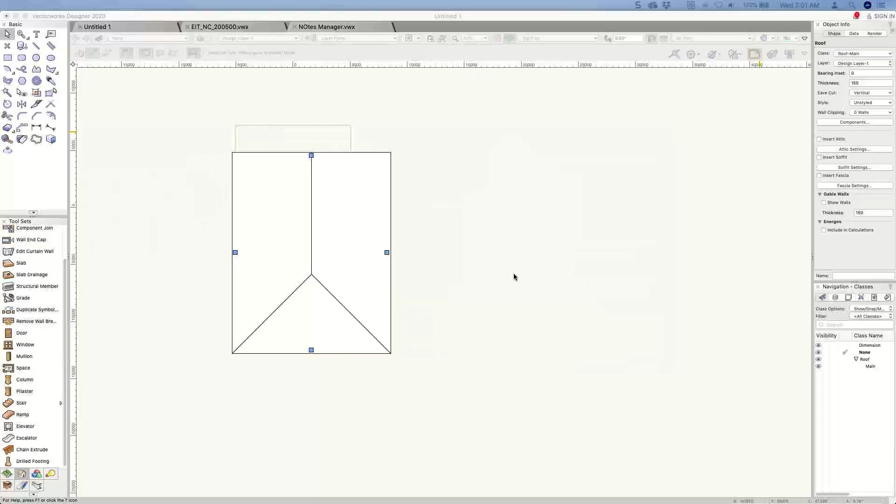I don't know if anyone's been looking at the Teaser Tuesdays that Vectorworks has been releasing. Some of those, the 3D modeling and the change in the interface, extremely cool, and I think really productive. And Barbara, we're going to plan to have a What's New in 2021 free webinar, aren't we? Absolutely. And I'll show you how to take advantage of those things as well.

So I'm going to start by looking at a roof. So the first question, let's look at my first question. The first question I had was, what's the best place to get started thinking about the marionette tool?

So one of the issues I've got, Ashot, is that the marionette tool requires, I guess is too strong a word, but in order to use the marionette tool, you've got to understand the thing that you're trying to make. Now the marionette tool, and marionette's not alone in this, there's a couple of other things that do the same type of thing. It's called a visual scripting tool.

And the idea is, can you see my screen, Ashot? You can see there's a little animated GIF that I've got running here that goes through the concept of marionette. You need to create an input, and then you've got a thing called a node. The node tells the input to do something, that is, take information, take a dimension. You can see what we've got here is I've actually created a manual on how to use marionette, and these were just some images I took from it. So we've got an input, the node does something, we then do something to it, and we get a result. The basic concept of marionette is that you've got nodes, and then you connect the nodes together with wires, these little curvy things here.

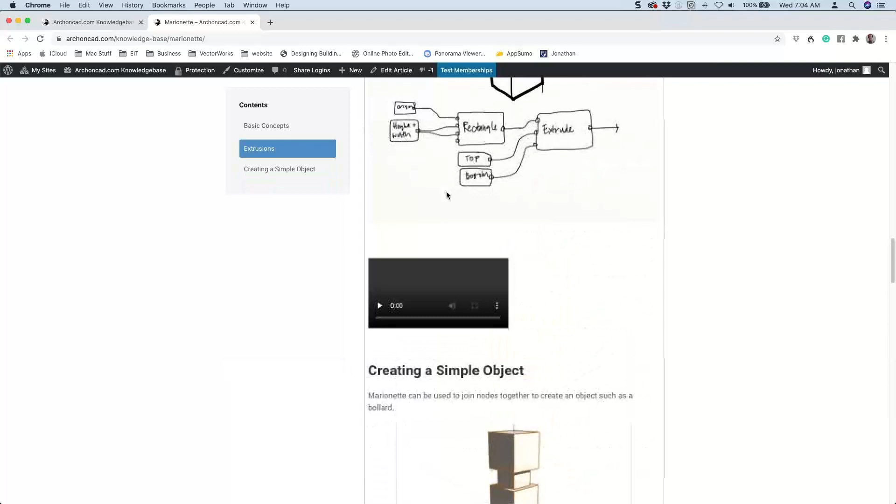And it comes a little bit back to the way you create a three-dimensional object in Vectorworks, or the way you create a complex object in Vectorworks. We don't start by creating a complex object. We start by creating a simple object and then adding another simple object to it and then another simple object. So I've tried to create a manual that works through this. On my old website, learn.archoncad, there's actually a manual that goes through this, and I'll make sure I provide a link here so you can read through the manual itself. I didn't want to do marionette today, perhaps, but if we have time, I wouldn't mind doing a couple of simple things with it.

But the real trick is that you have to learn to break this object up into chunks. So, for example, if we were going to build the bottom of this object here, we'd want to get a rectangle and we'd want to extrude it.

If we want to get a rectangle, we need to know the height and the width of the rectangle, and we need to know where the origin of the rectangle is. Those nodes will input information, feed it to this node here, the rectangle, and it'll feed the rectangle down that wire to this next node here.

Then we need a dimension for the top and the bottom of our extrusion. So the top controls the height at the top, the bottom controls the start elevation. We add that to the rectangle and we get an extrusion at the output.

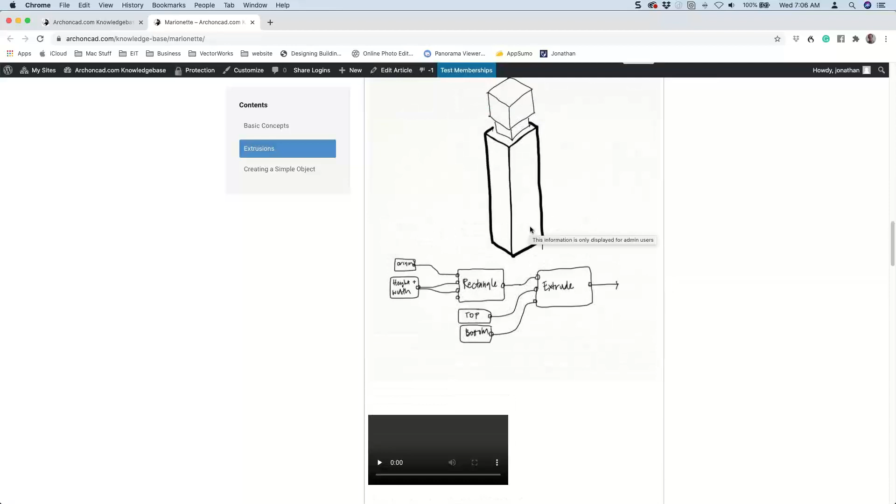So it's really a matter of understanding how these things flow. And I don't know why, but they flow from left to right. You can't make them flow back the other way very easily. Could be something to do with the way we write from left to right, maybe. So too bad if your language goes the other way. But anyway, that's the basic concept. I think if you want more, we'll get into more later.

But the next question I wanted to cover was the question about stories. So Faye, you said that you tend to use layers, but you have trouble using stories. So let's go back to Vectorworks for stories. Now I think that you need to have a use for using stories, Faye. You don't always need to use stories, but you need to think of stories as being a collection of layers.

So if I go in here and I start creating stories, and where's it gone? It's gone to the other screen, of course. Let's bring that in.

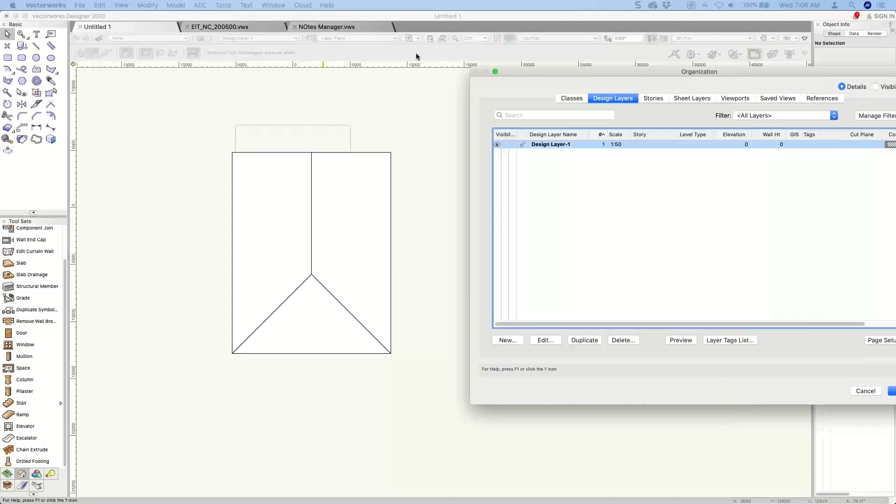So if we have a look, we've got this concept of stories. Now, if you've got stories already created, let's just add a few stories. We'll just duplicate a couple. If you've got layers already created, I should say, we can create stories and add those layers to stories.

But it's a lot easier to start from the beginning and add those things from the beginning. So, for example, if you're going to use stories, it's better to start right from the beginning with stories. I'm just going to delete all of these. It's better to start with this without anything on your design layer and start by creating stories.

So first of all, Faye, what are stories used for? You need to think of stories as being a collection of design layers and a collection of controls is probably the easiest way. So when I create a new story, I can call it story 1. Now Vectorworks does like calling it story-1.

I've tried calling it level dash or level or floor, but Vectorworks quite likes calling it story. So in the end, I just stopped arguing with it and just let it do it. We've got here a collection of levels. So levels in Vectorworks can either be a layer or a three-dimensional height control.

Now, I don't use stories very often because a lot of my work is single story, only one floor of the building, or at the most it's two, and I don't use levels to control a lot of things. But let's say, for example, I wanted to create stories and I wanted to use stories to help control things like my door and window heads, which is quite a cool way of doing it.

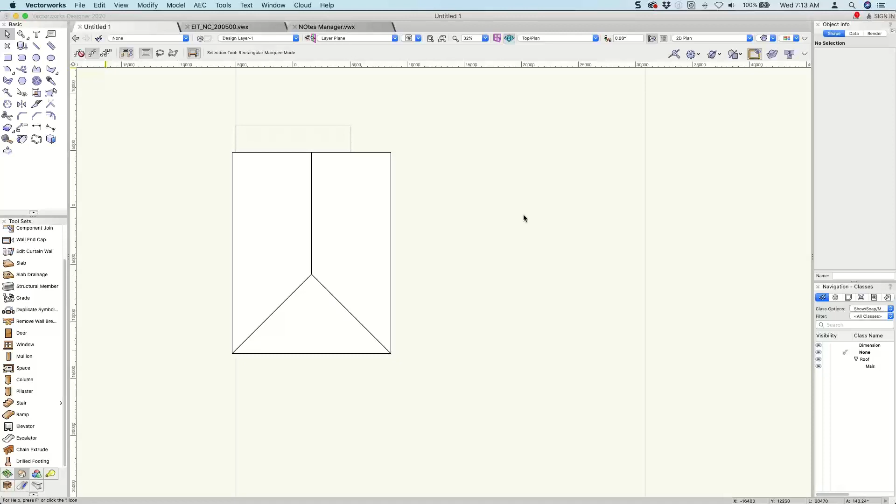Now, I just don't know what some of these levels mean. Sometimes when I create them, I think this is a Vectorworks thing. Some of these are Vectorworks ones. So I'll start with a brand new blank file and we'll see what Vectorworks have got for us. File, new, I need a blank file. So this is a brand new blank file from Vectorworks.

If I go here and create a new story, these are the typical Vectorworks stories that it creates. There's one called ceiling, top of parapet. I'm sure these used to have different names, something like ledge. I actually don't understand what a ledge is, so I don't know if I want a ledge. In fact, I don't even like the word ledge. So I'm going to edit my defaults.

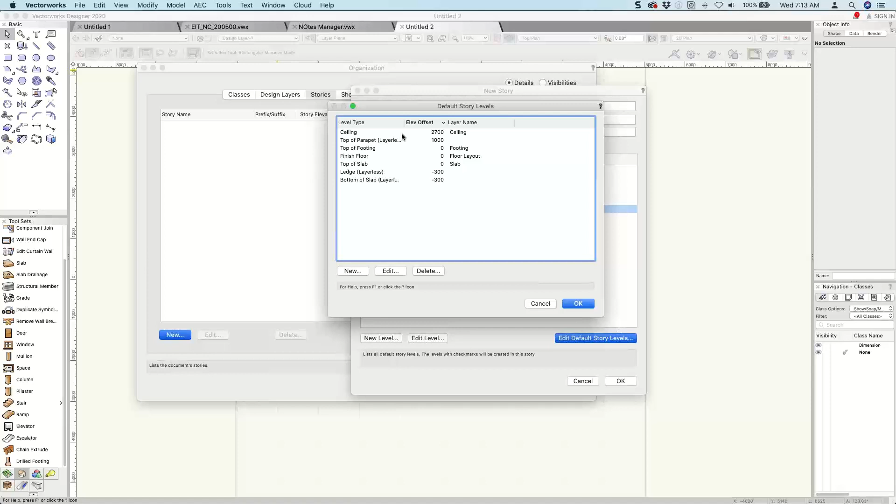Now, if you don't edit your default story levels, you don't get the ability to apply them to every different layer. So ceiling is pretty straightforward. Top of parapet, that might be quite useful. But what do we mean by top of parapet? Parapet's normally a wall at the high level.

I don't use those, so I'm going to remove that. I don't like the word ledge, I never know what it means. Does it mean the bottom of the slab? Is it the bottom of my brickwork? What is it? It could be anything, so I'll get rid of that. So I've got a ceiling, a top of footing, a finished floor, a top of slab, bottom of slab—I don't like that one either, so I'll get rid of that one.

So the sort of things typically that I would use for my default story levels would be, let's start from the ground and work our way up. So let's go new layer, new level type, and this is bottom of footing.

Better spell it right. Is that better? Eventually got there. So, bottom of footing. What's the elevation of this? Well, it might be working in millimeters, so let's make it -3 feet, -900 millimeters.

Do we want it to create a layer? No, we're just using this to control the elevation of something. Let's create a new one, called top of footing. Oh, there's one there already, top of footing. The elevation is -600, so -2 feet. So I'm actually going to end up, I can create a wall that goes between the bottom of my footing and the top of my footing, and it'll be exactly 300 millimeters, or exactly 12 inches.

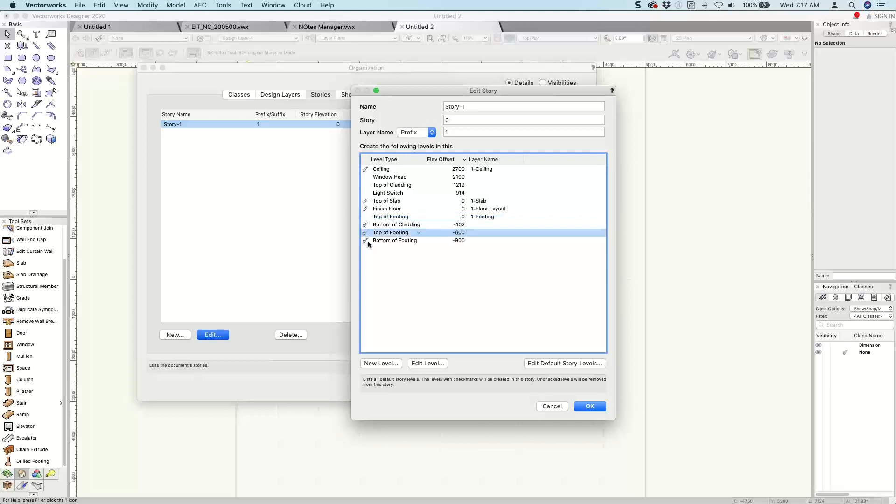We need a finished floor. Do we need a top of slab? Yes, maybe no. We need a light switch, we need a cladding, we need a window head. So down here, you just tick the levels that you need, and it'll create the elevation controls at this point.

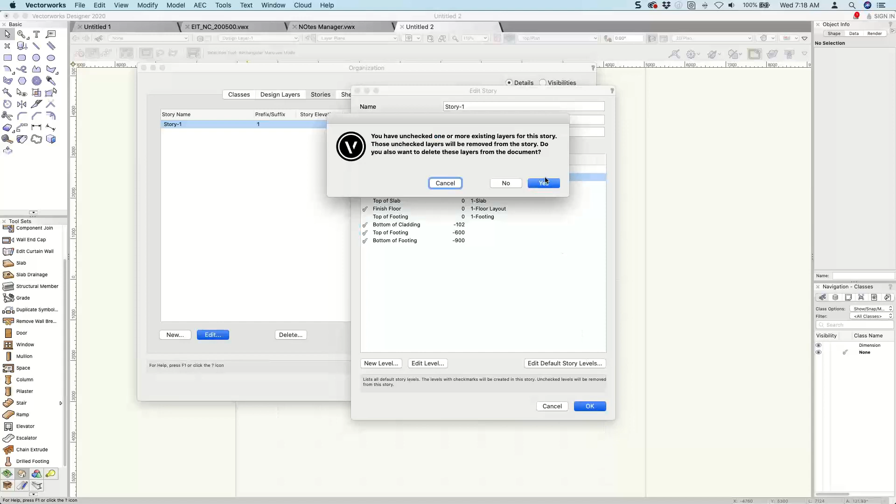So let's OK that. And yes.

Barbara, I see there's some questions. Let me just have a look at the questions. It's some people saying they missed the start. Hold on. Yeah.

Right, so someone would like to review strategies for the wall tool. Maybe we can have a look at that. And someone's asking questions about site modeling in 2021. I'm sorry, I can't talk about what's in 2021 until Vectorworks mention it, but if there's a change, Bob, we'll certainly be looking at it. So, Faye, I'm not sure whether I'm answering your questions the way you want. If I'm not, please send some more questions through, and let's make sure that we're getting the information that you want.

So we've got this ready to go. We can go to our floor layout here. For some reason it's called layout. I'm going to create a wall now, Faye. I'm going to create a brand new wall, and of course it's going to create that on my other screen. So here's my wall here.

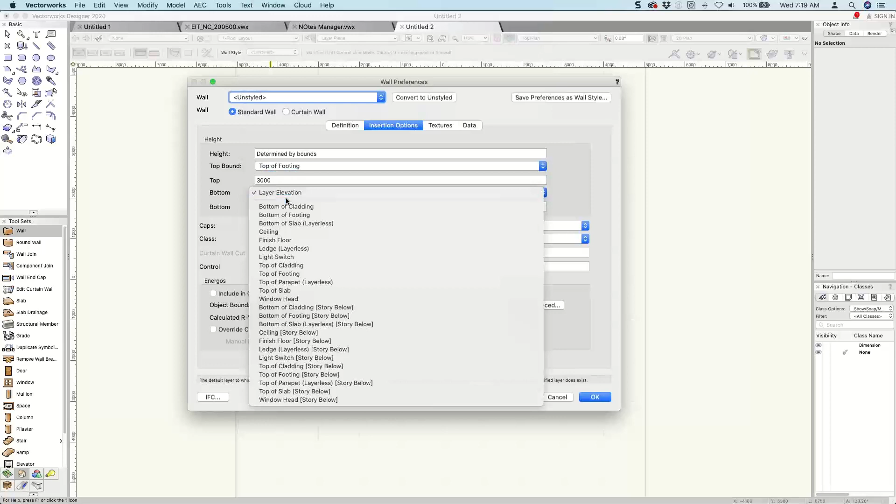It's an unstyled wall, and I want this to be a foundation wall. So what do I want to happen with this? My insertion options are to set the top of the wall, the top bound is the top of my footing, and the bottom of my wall is the bottom of my footing. And let's get rid of this number here. So if I create this wall, it should be fixing this wall between the top of my footing and the bottom of my footing.

So let's just draw a quick wall and we'll try it, so that we'll just draw a simple building. There we are there. Let's look at it in 3D, and that should have fixed it between the top of the footing and the bottom of the footing. The height should be 300. Now I'm going to save this as a foundation wall, so let's save this, go save, and we'll call it foundation.

So that's a foundation wall. Now I want to create a new one. I'm going to create a more complex wall. This one's going to have components in it.

So this is going to be my lining. I always start on the outside, so it's my cladding. Cladding, its function is outer finish. Its class, and I should really have classes for all this - I'm not going to go through that at the moment. But I tend to use a class for the cladding, for the air gap, and for the framing.

And I've got all those things stored in a class. I use a class and layer. I just got to go find it. It's hiding in my Dropbox. So you guys can't see it because it's on my other screen, but I can see it.

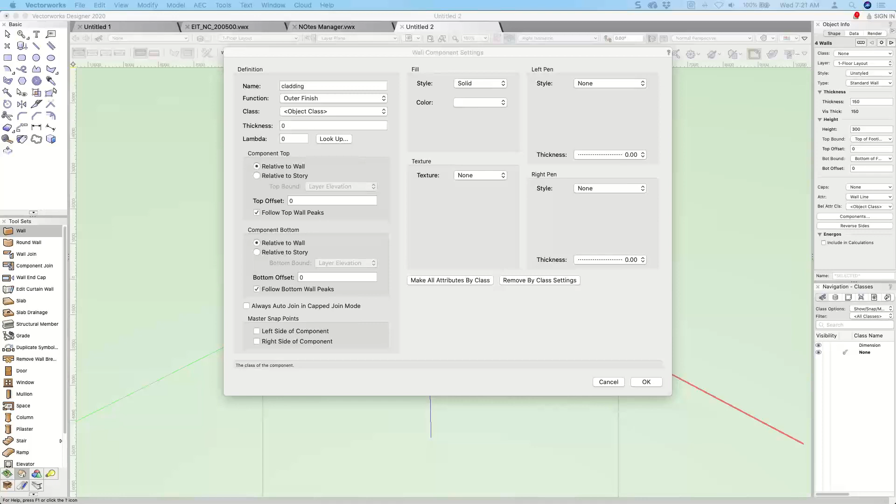Vectorworks Architect. Cool, so I've got a standards file which has got all the classes that I like to use. So I can hit the letter W, and you can see all my wall types. So I can import all of these components.

And this is going to be wall component cladding. The thickness is 90 millimeters. I'm not going to worry about the lambda. The lambda relates to Energos, or the energy calculation side of things. I'm not going to worry about that. So my component top is relative to a story, which is top of cladding.

Where's top of cladding? There. And the bottom is relative to a story called bottom of cladding. So this is now going to control where my wall stops and starts based on the levels that I put in. And we'll make all attributes by class.

Now I've got an air gap, so I'm going to create a new thing, which is my air gap, which is a cavity. Its function is air gap, and its class is wall component cavity. Its thickness is about 50 millimeters, about 2 inches, and it's relative to the wall.

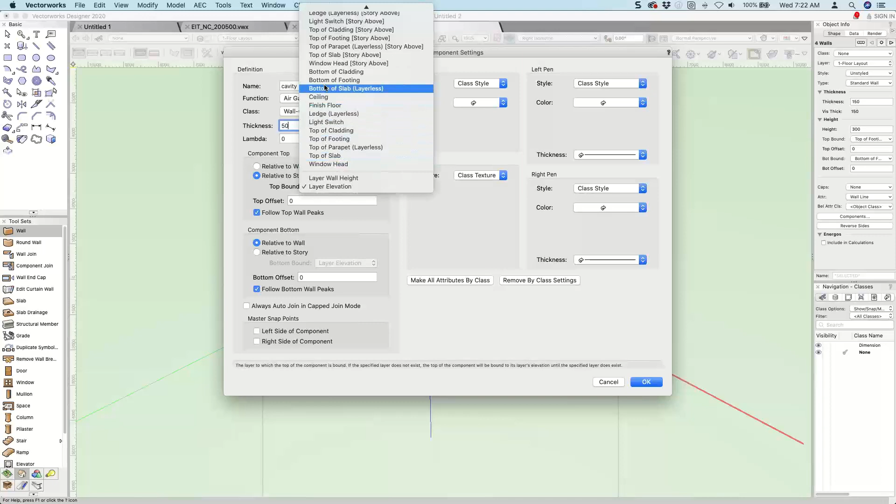This time, because my air gap's going to stop at my top of cladding, I'm going to stop it there. Now let's leave it relative to the wall, and then we'll play with this. Let's go OK on that.

Next thing, I need some framing. So I'm going to put timber framing in here. Its function is load bearing. It's going to be wall component, and I'm going to do frame. And its thickness 6 inches or 140 millimeters.

I think that's enough at the moment. So now what I'm going to do is I better save that too. So let's save this preference, and we'll call it brick wall.

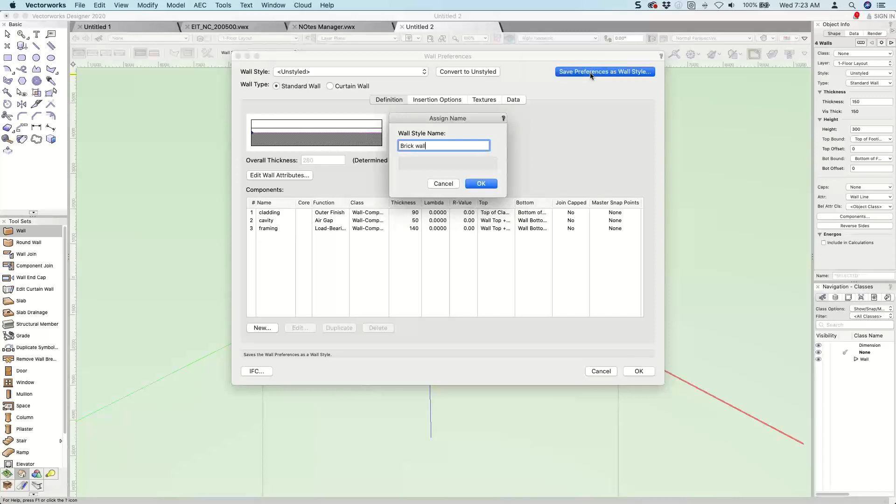Cool, now I'm going to use what I've already drawn as the start of my wall. So if we look here, we've got the ability to do wall control line, which is using the overall size of the wall. This is my control line on the left. If I choose my core component, let's go back to my brick wall here.

I didn't nominate which is my core, so I'm going to nominate framing as my core. I'm going to save this again as brick wall and replace the old one. So now I've notified, or I've indicated that one of these is the core of the wall.

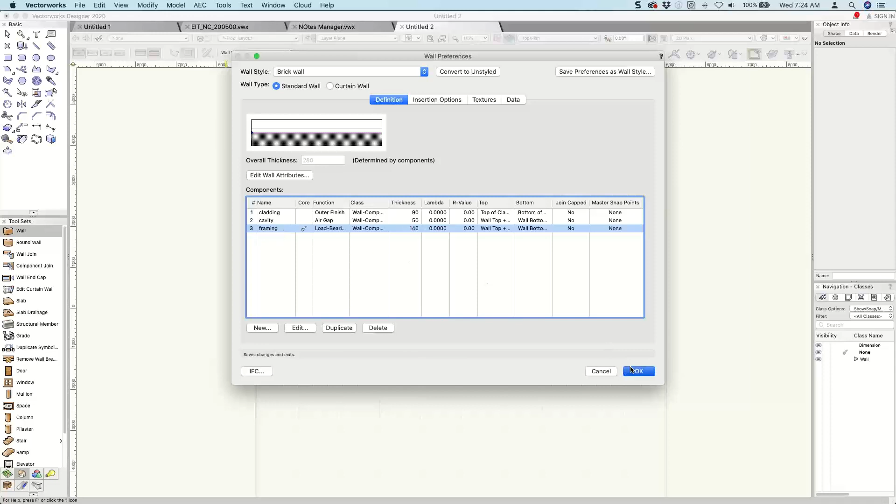And now I can use this option here, the wall core, and I can use that outside point there to that outside point there. And you'll notice this time that my wall is sitting here, and there's a gap between the two of them, because I really need a foundation wall that goes between the two, and all I've really got is my footing.

So if we go back to my wall styles, we're in this one here. Let's look at my foundation wall. Let's edit this one. And what we'll do with this particular one is we'll edit this wall style, and we'll tell it that the wall style needs to go between, the top bound needs to be the layer elevation.

And they should all have changed. Did I save that? Let's go back and edit that again. Foundation, layer elevation. Okay, and these ones, I've got too many selected. Let's select that one.

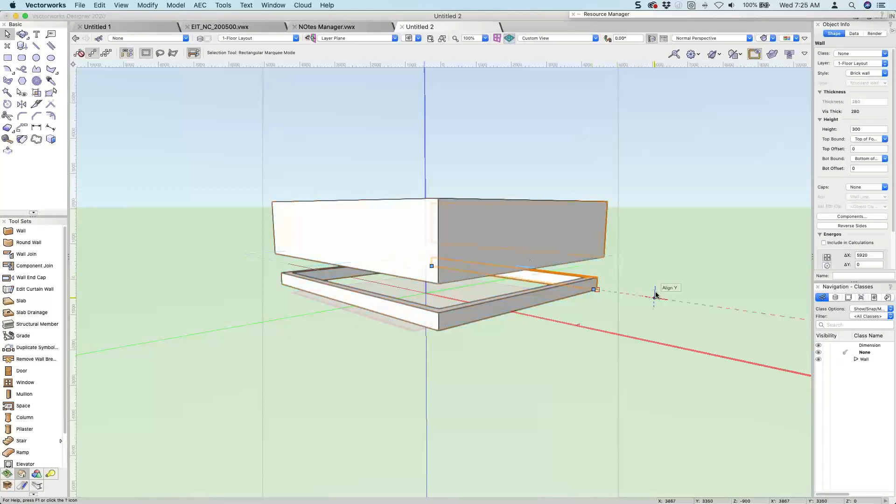These ones need to be selected, all of them again. If I join, maybe I've joined them all together. Let's delete those ones. I'll just select those ones there.

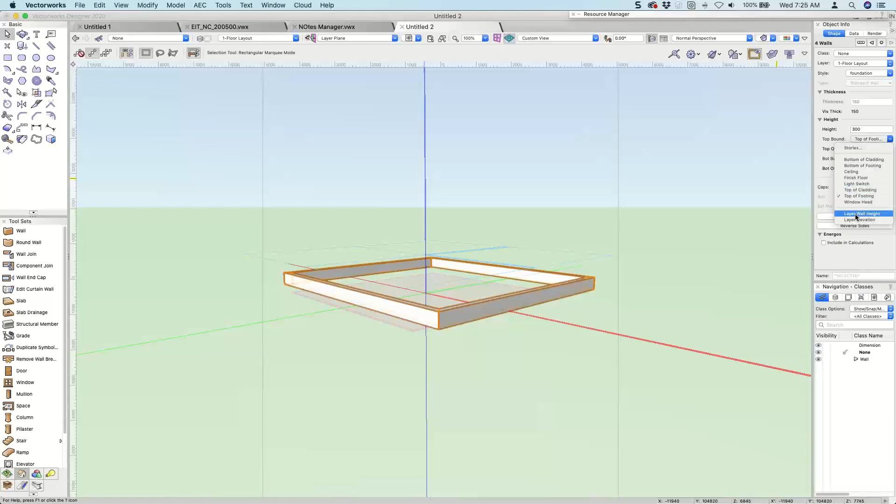As I thought, unstyled. So let's replace this with my styled wall, with my foundation. And now that should have changed to the layer elevation. So it should have brought my foundations up.

And then my other wall should be sitting on top of those. Now I'm worried that - oh yeah, cool, that's not. Now let's go back to my other wall.

This wall here, let's look at my wall preferences and insertion options. So the top bound of this wall should be the layer wall height, and the bottom bound should have been the layer elevation. That messed me up a little bit. We'll save it as a brick wall again.

So this time when I draw the walls, I should be able to draw those walls like that, and they should come together beautifully. You can see here I've got this wall, which is my brickwork.

So what happens if we then go to the stories and start changing those story heights? Let's edit our stories, let's go to the top of the cladding here. Remember, this is the top of my brickwork. If we edit this level and make it 12 inches or 300 millimeters, it should affect all of those walls that go around the outside. So that's a description of how you can use the stories.

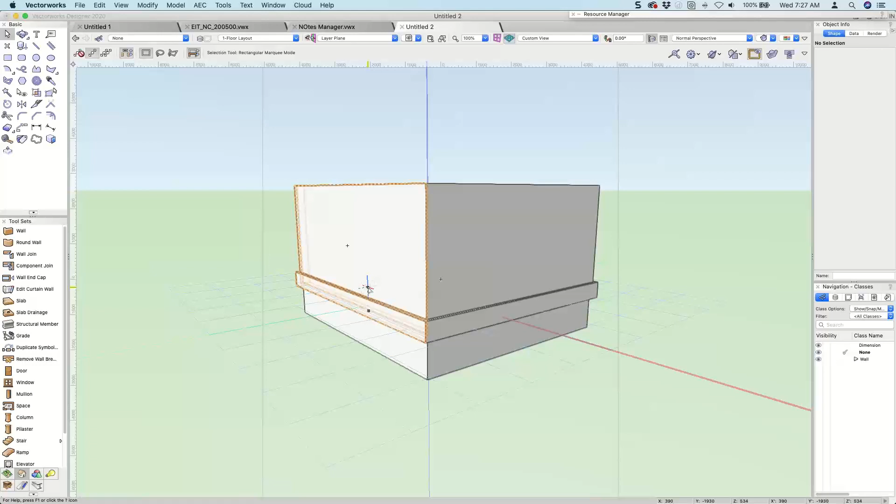So Faye, back to your original question. My curiosity is, do you want to use that complexity, or are you happy to do it a different way? Because there's more than one way to do this.

And if you want to use these levels, they can be very powerful. When you create symbols, you can connect a symbol to that object. If I've got a light, I might have a light switch I can use. Electrical, switch elevation, switch, I think this one will do.

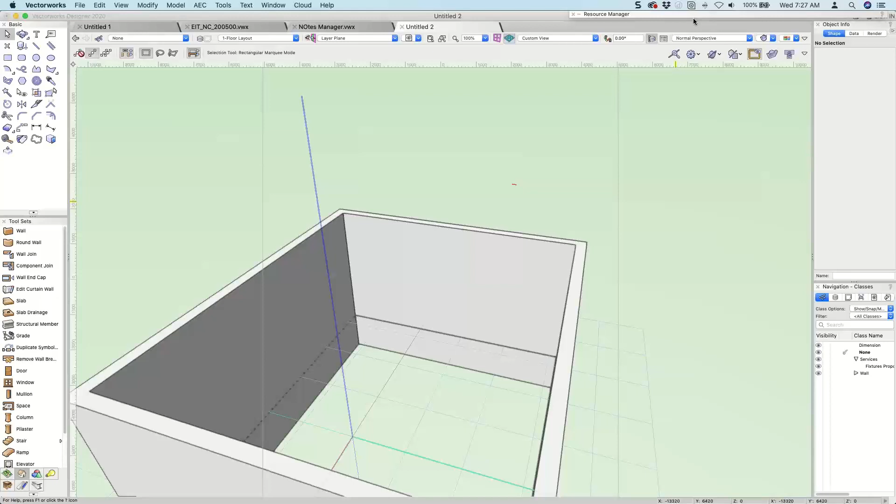When I place the switch, it's a 3D switch, my ones - no, I have created some that are three-dimensional. Not the elevation one, I've created some light switches which are three-dimensional. I think this one here, socket 2.

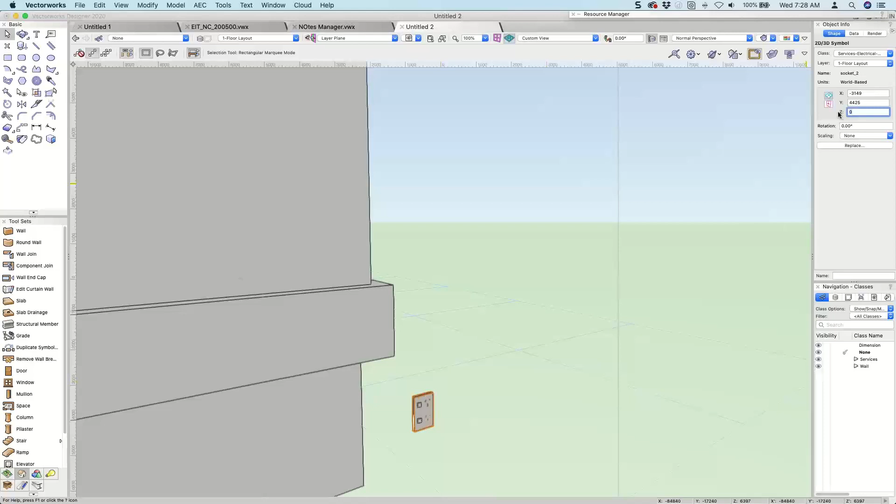And when you create that switch, you can see it's got an actual socket to it, and I can set a height to that. But you can also, when you create the symbol, link it to a particular level.

So if we go back to this file here, it's called socket 2. Let's edit my symbol options. Here I can actually assign it, I can make it story aware. And did we call one light switch? I think we did, light switch.

So we can say it should be on the edge of my wall, and it should align up with my light switch elevation, and then that thing should jump up to my light switch elevation. So if I've changed the light switch elevation, it should work.

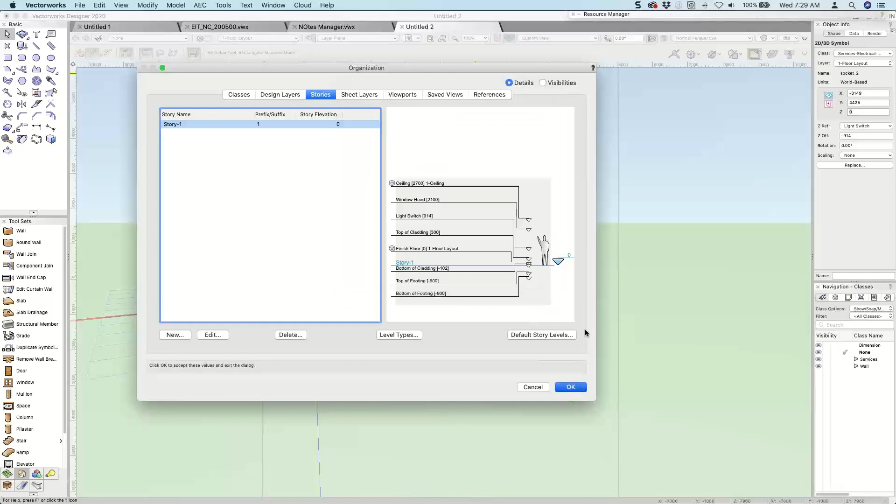Stories, light switch 914, so that it should have made that thing jump up to the light switch, which I think it's done. Has that light switch got Z offset 0? And you can see there, now it's sitting on my light switch elevation. If I change the elevation of that layer, that light switch will go up and down. So there are some things that are really quite important.

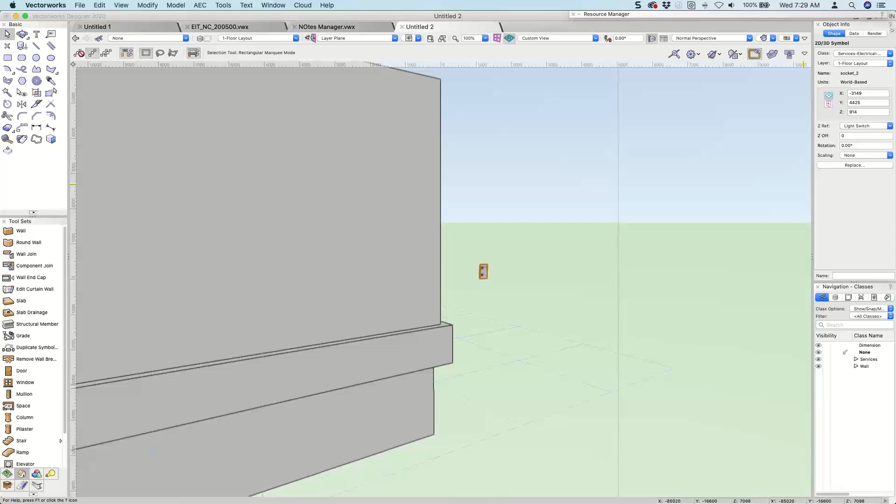So Faye, some of these things - you said now that you understand stories a little bit more, you're quite happy sticking with layers. Just when you're sticking with layers, that's fine, I often just use layers. Remember to control the 3D height of the things, so you can create the things that you need.

How are we getting on for time? Okay, so Faye said she's happy.

So let's talk about roofs. I've got a roof I think I wanted to play with. One of the things I wanted to make - someone was asking me about creating a skylight to put in here. So I'm going to use a window to create a skylight. Here's my window here.

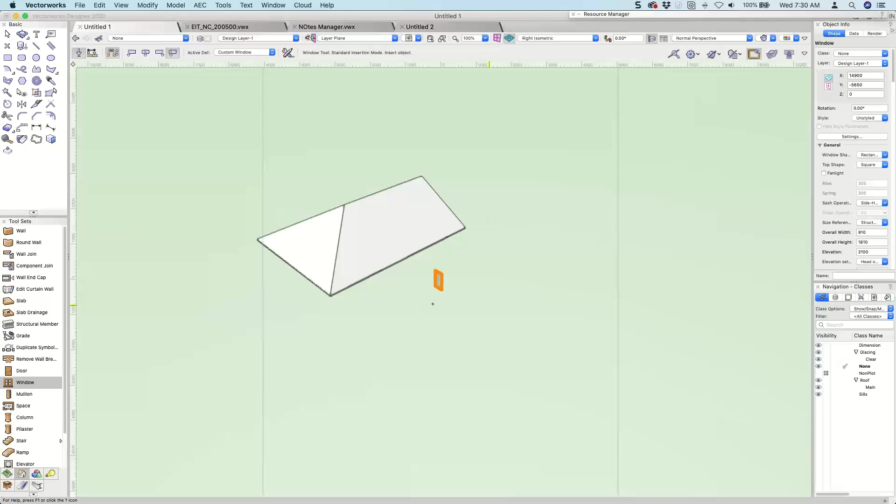The beauty of using a window to create a skylight is that it's really easy to create a simple window. You can put mullions in it, you can put breaks in it, you can do all kinds of cool stuff, and it does create some of the structure for you.

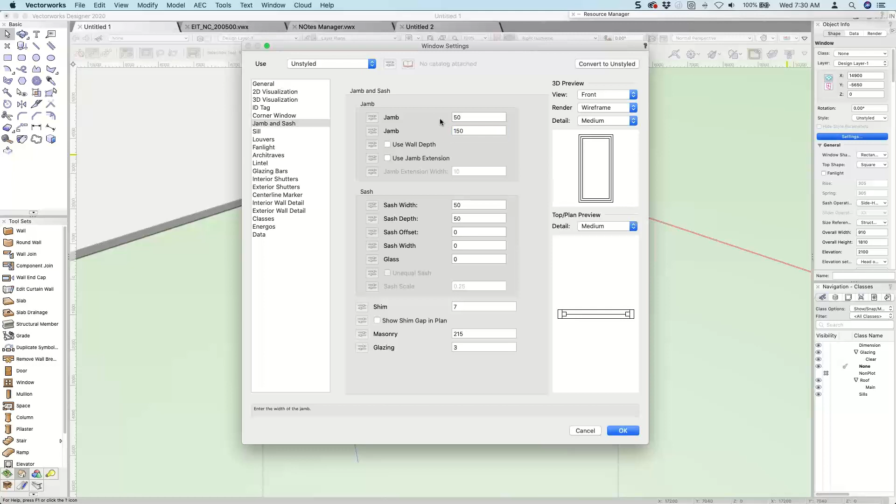I'm going to go to my settings and make it a little bit more the size that I need. Let's just have a look at my window settings. So for my window settings, I need the jamb to be about 50 millimeters, but I need this to be 6 inches, 150 millimeters.

Now, if we leave that window as it is and we stick it in and try to use it as a skylight, you have to make it into a symbol. But if you make it into a symbol without ungrouping it first, then it doesn't work. So there's something really crucial about where we place the insertion point of our symbol.

So I'm going to make this so it's easy mathematics for me. I'm going to make it the structural opening, exactly 3 feet, 900 and 1800, so the mathematics is easy.

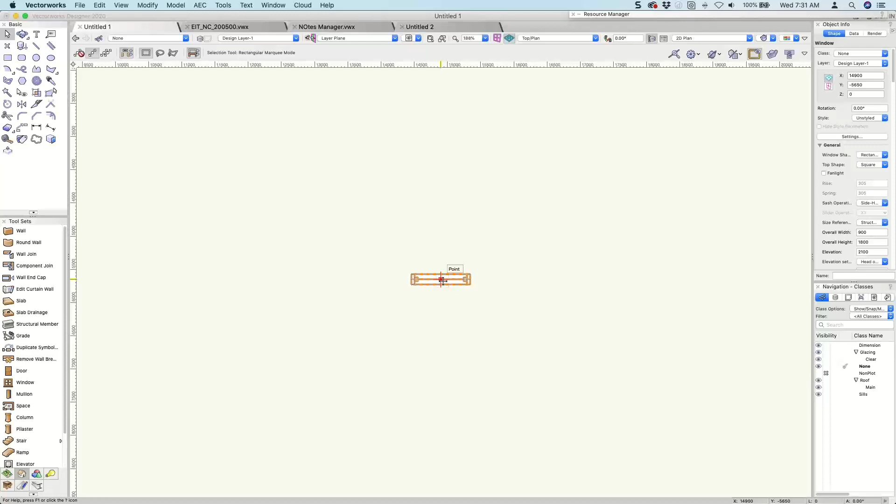So the easy way to create this into pure 3D only, because it can't have any 2D parts, is to go modify, convert, convert to group. When you convert it to a group, you lose the 2D part of that window. So I'm going to use this as a skylight. Next thing I'm going to do is make this into a skylight - create symbol. This is my skylight.

Next mouse click. Don't insert on walls. I can choose a class for this. So I can create a new class and call it...

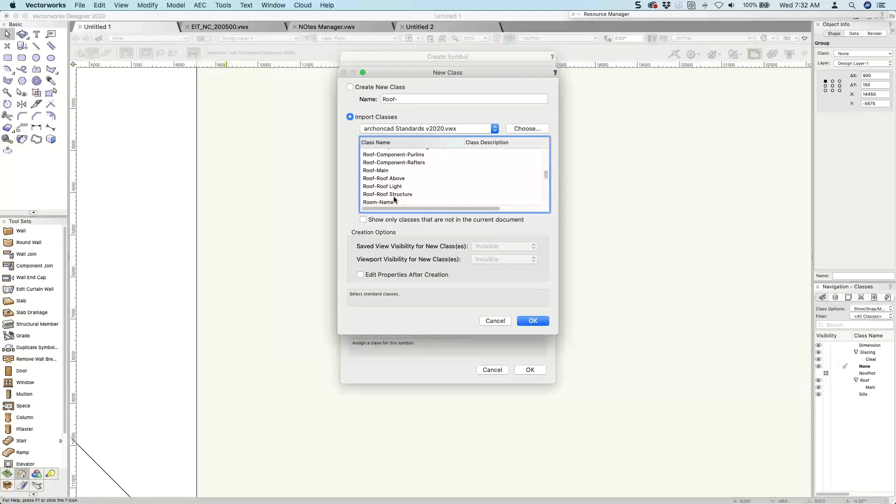Roof-skylight, but I might have one already to go. Let's go letter R. Roof, components, roof main, roof above. I could use one of these ones, roof light.

It's really handy if you've got a list of classes that you use on a regular basis, save it. Those of you that subscribe to my website will find it under the library options. You'll find that I give you my classes. Makes it so much quicker.

So I'm going to click here and OK. So the insertion point of the symbol, it's now a symbol. Let's have a look at it. What did I do wrong?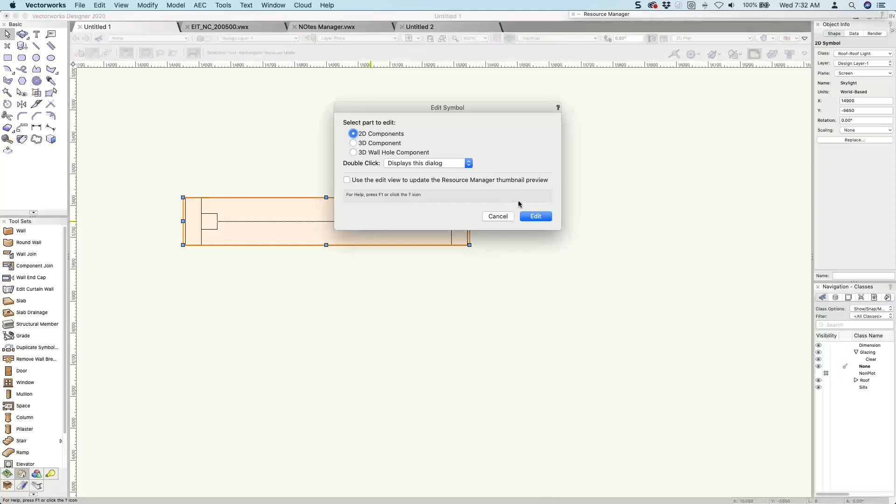I'll tell you what I did wrong. Let's go back. It's a window. I converted it to a group in a 2D plan view, and all I ended up with was a 2D version. What I need to do is change to a 3D view, do the same thing, convert to group, and I'll end up with just the 3D portion.

So now I'm going to go back to a plan view. I want to make that into a symbol again, create symbol. It's my skylight, so I'll call it skylight 900 by 1800. So I know what size it is.

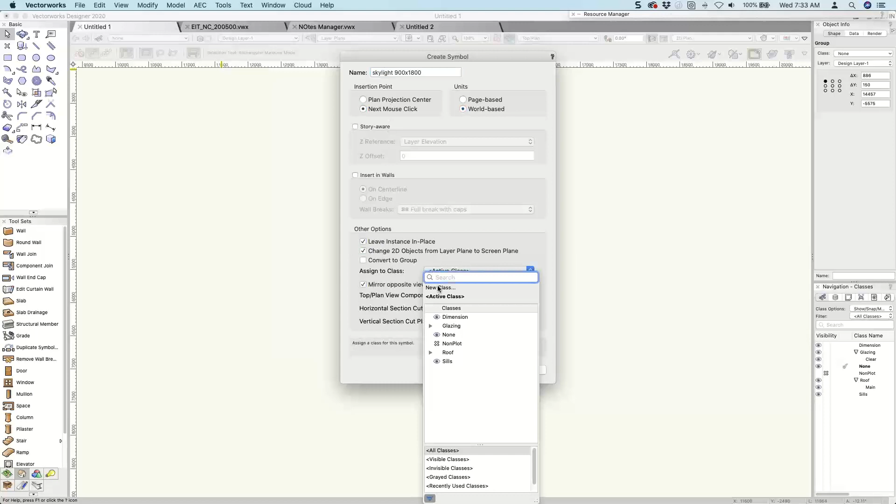Next mouse click, let's put on a class, we'll call it roof. Let's create a new class, roof light. There, okay.

Cool, so there's my symbol, it's in 3D. Let's find it and we'll have a little fun with it. This one here, skylight, let's edit the 3D component.

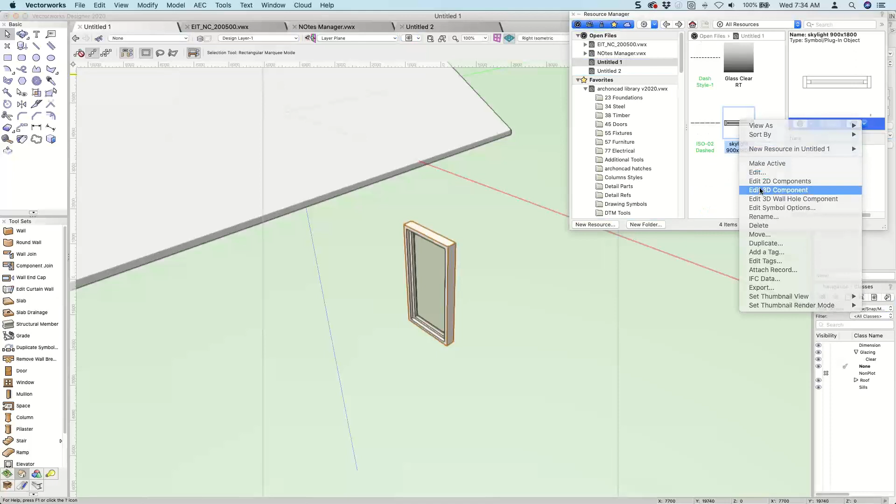So if we have a look at this and we look at this in a front view, there's the insertion point of my skylight there. There's my skylight sitting above it. When I place that onto a roof, it's not going to sit where I want it to.

Now, in order to place, I find the easiest way to place a skylight on a roof is to drag it from the resource manager, have your roof and plan view, the roof highlights, you let go, and it places that, first of all, it places it as a dormer window.

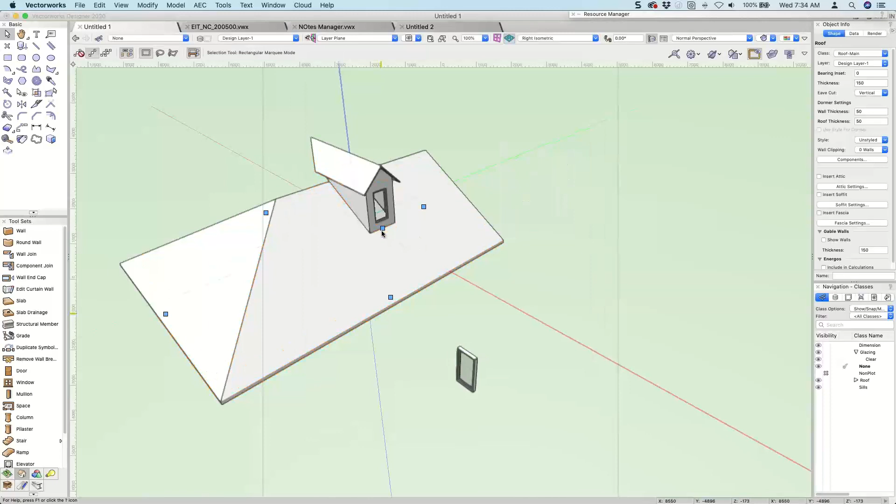Click there, that little dot, there's a little dot, just a little blue dot, just at the bottom here, that's the one to click on, and I'm going to say edit skylight. It's now a skylight object, and you'll notice that my skylight doesn't line up with my hole anymore.

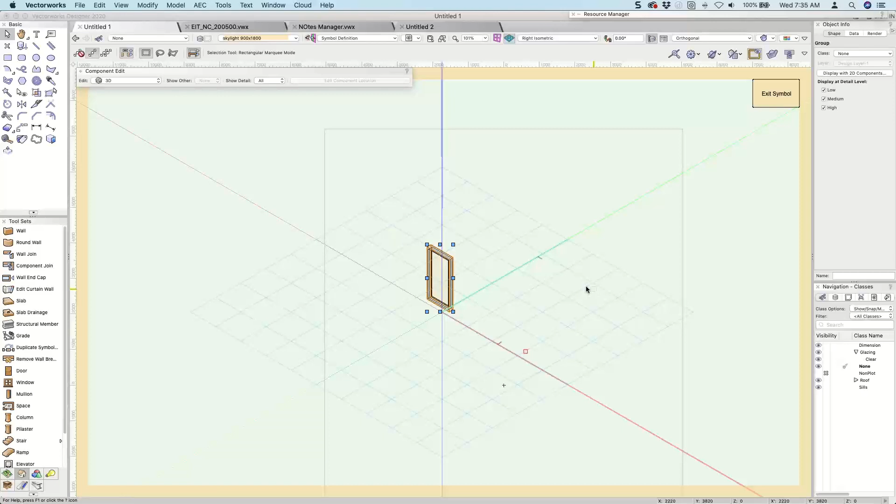The reason it doesn't line up with my hole is because of my 3D view of my window. Let's have a look at this in 3D. So this should actually, it should be the center of my window, of my skylight, should be at this 0,0 point. You can see there's a green line comes down, there's a red line comes across. That should be the center of my skylight.

If you don't make that the center, let's look at this in the top view. It's that face there. So it's got to be that edge of the roof. This point here, this edge of the roof here, sorry, this point here is going to be the edge of my roof. So if I want my skylight to sit on top of the roof, then I need to put the insertion point on that face of my symbol.

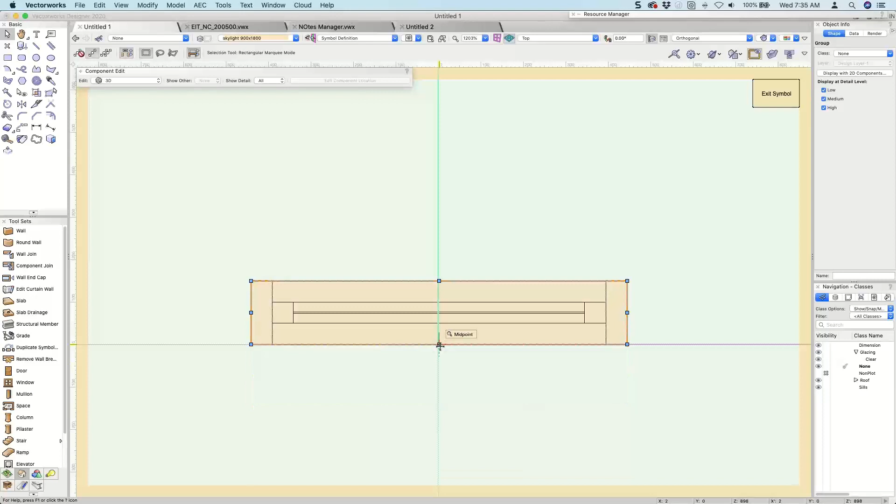If I put my symbol this way round, my symbol, my skylight will be sitting inside my roof, and this is the face of my roof. This is the inside of my building, and it's going to sit inside the roof. I don't want that.

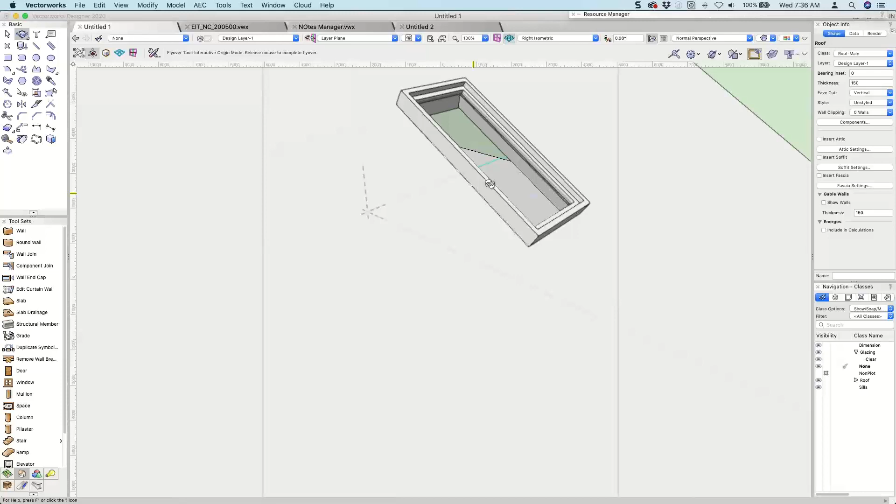Let's exit my symbol. Let's render the view. Yes. And now you can see quite clearly my skylight is sitting on top of my roof. So it starts at my roof face and comes up.

Where I live, I need a 6-inch upstand for my skylight. So why not build it as part of your symbol and you automatically get it for you.

Since this is a skylight, I've got some settings here. Eaves cut on my roof. Let's go here. Hole cut is square. And you can see now that my skylight's cutting square through my roof.

If I go back to that blue dot there, I can make them splayed. Sometimes the splayed works for me, sometimes it doesn't. In this case, it's not too bad. It's splaying that way and that way.

Let's make it square again. So that's my square skylight.

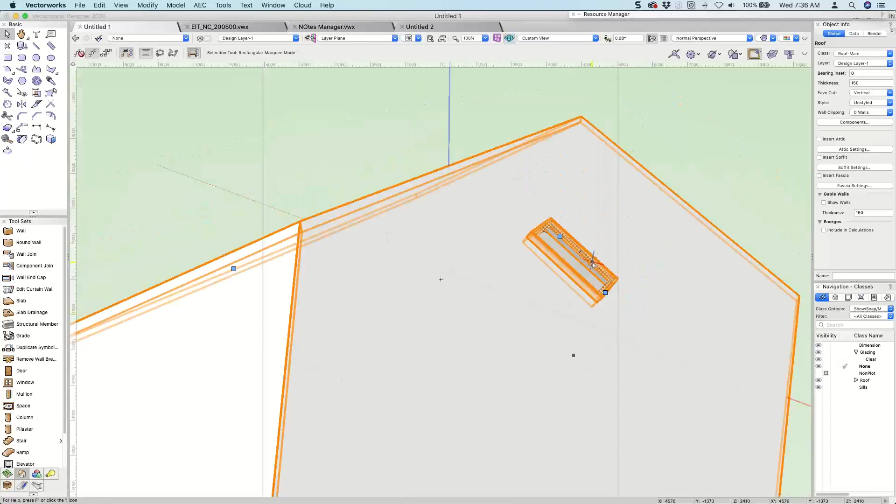And if you follow the strategy, they work really well. But you have to be careful and you have to work methodically. And if you try to break the rules—so I was helping someone yesterday and he wanted to use just a window object. He didn't ungroup it or convert it to a group first, and it just showed as a blank hole. And once he converted it to a group, he didn't have the insertion point lined up, so his skylight didn't arrive in the right place.

There's a couple of other questions. How do we apply fascias to the roof rake? There's a couple of different ways. So Brandon, your question is, while you're on roof items, could you briefly cover the best ways to apply a fascia to the roof rake? We're talking about this bit here, which we call the barge where I live.

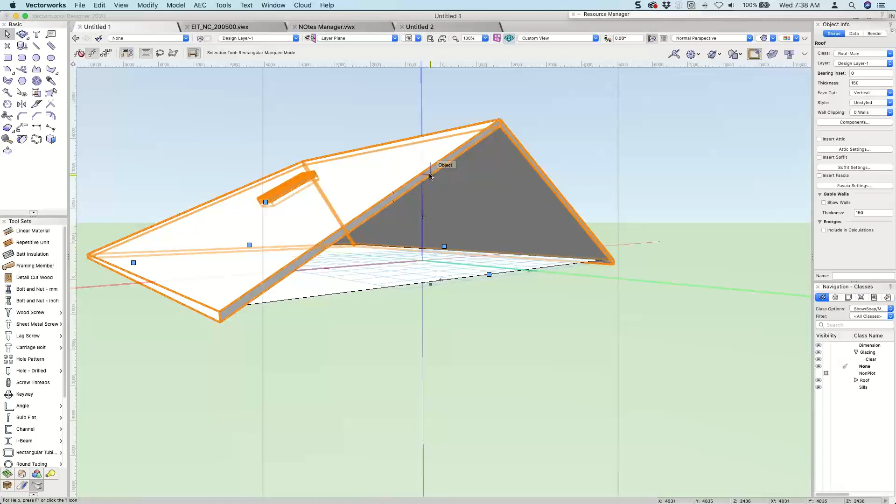So you can create a barge board. There's a couple of different ways to create a barge. One of them is to use a framing member. Where's my framing member? There it is. First of all, let's have a look at this - what angle is my roof? I'll just click on this bit here.

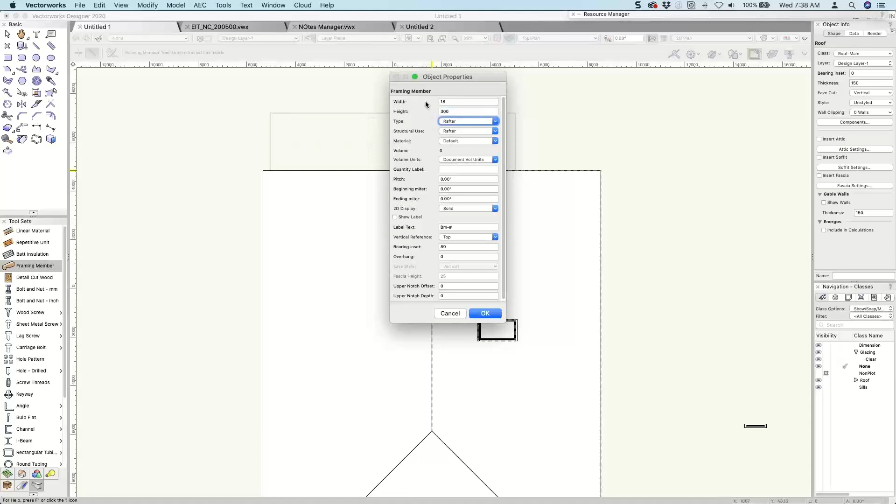30 degrees, that's easy enough. So I can use a framing member. I can draw my framing member from there to there. What sort is it? It's a rafter. How thick is it? It's 18... let's make it 300. It's a rafter, and its pitch is 30 degrees.

Let's look at it from the back. Now, for some reason, it's not showing that roof. How weird. Isn't that strange? I'll get rid of my skylight. Okay, there it is. So Brandon, does that help? Is that a quick way to make a barge board? So you can just make it like that.

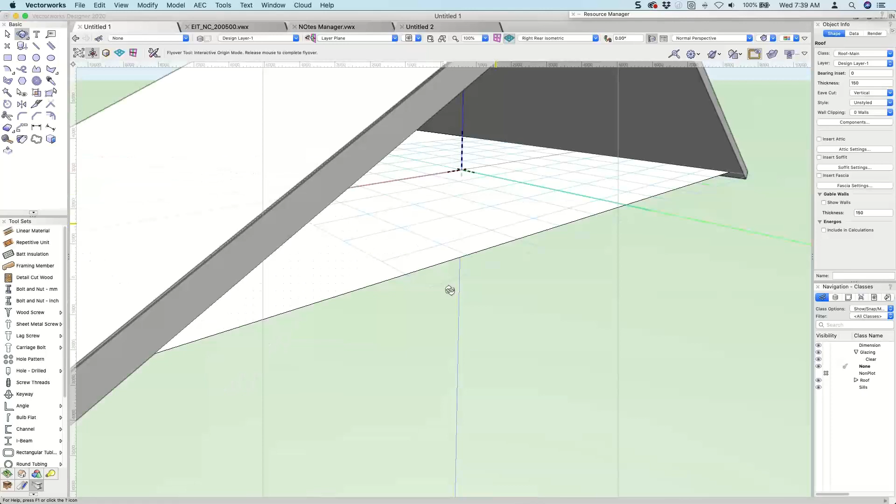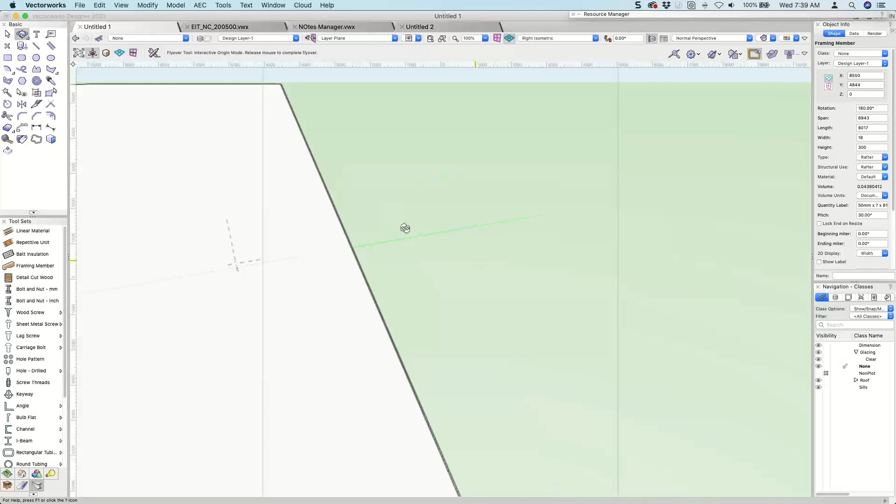Let's just zoom in. Now, I find this difficult - Vectorworks likes to do things solid. I like width, and then I can drag that width to sit there. And there it is. So that's an easy way to do it, I think.

And once you've done one side of it, don't forget to use the mirror tool, and then you can mirror that both sides. I'm just using my keyboard shortcuts to jump between my different views. So Brendan, does that answer your question? Way easier than extrusion? Yeah.

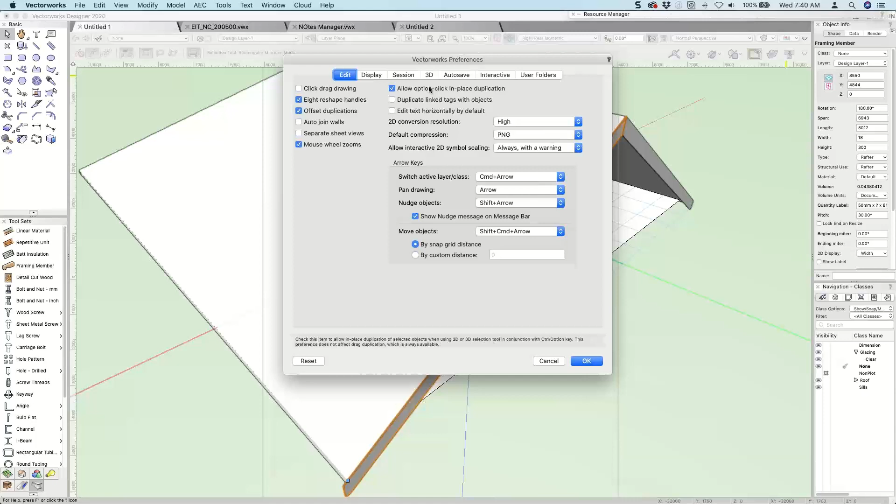It's missing a flashing though, isn't it? If only we could make a flashing for that. So I'm going to duplicate this. Now, before I duplicate, I've just got to check my preferences - they keep being adjusted by Vectorworks for some reason. Okay, allow, option, and click. Cool, so I'm going to make a copy of that. Only this time, instead of it being a rafter, I'm going to give it a custom profile.

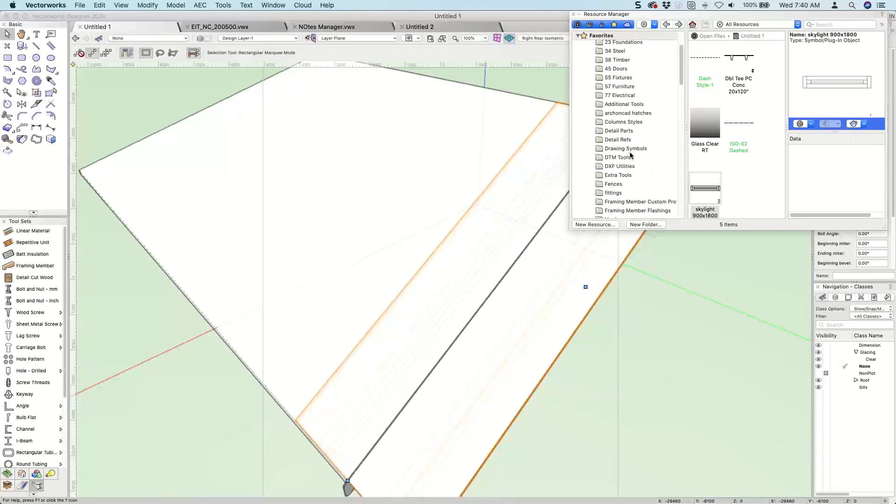Now, one of my custom profiles - I forget where I've left it now. Foundations, no, steel, timber, detail parts. I thought, oh, here we are - framing member custom flashings. It doesn't look like a barge flashing to me. We'll import it anyway, let's import that.

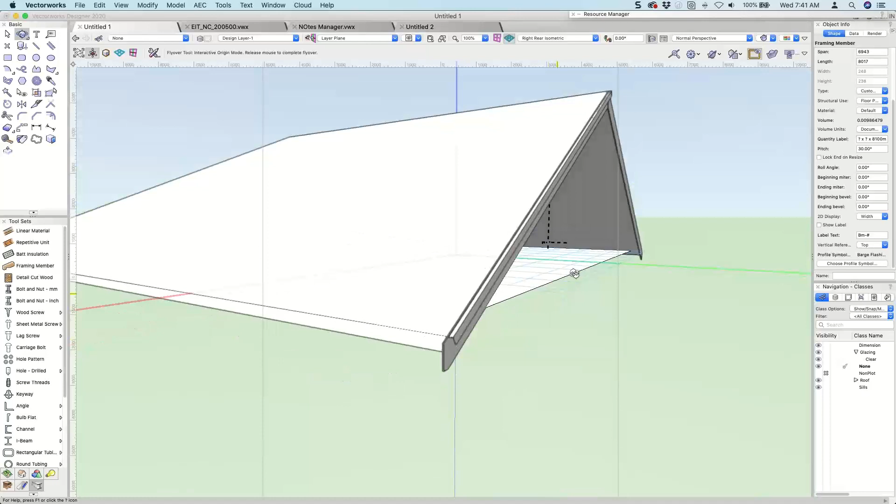So if I go back to my framing member here, can I change the custom profile and make it a barge flashing? There it is. It's not quite what I wanted, so I'm going to adjust that profile, because what I really wanted it to be - I don't know why I've ended up with two identical ones. It should have been two different ones.

Let's edit this 2D component. This is what it looks like in reality. This little dot here is the insertion point for that. So what I'm going to do is move this information, and I'm using the Reshape tool - so using the Reshape tool, I can stretch it.

So if I go to the Reshape tool, select my object, drag a marquee around those two corners, I can lift those two corners up together and make sure they line up with that edge there. I'm going to then grab these two corners and move those over to here. And you can see it's starting to get a little bit distorted. I'm going to highlight these corners and hit the delete key - so I've actually deleted part of it.

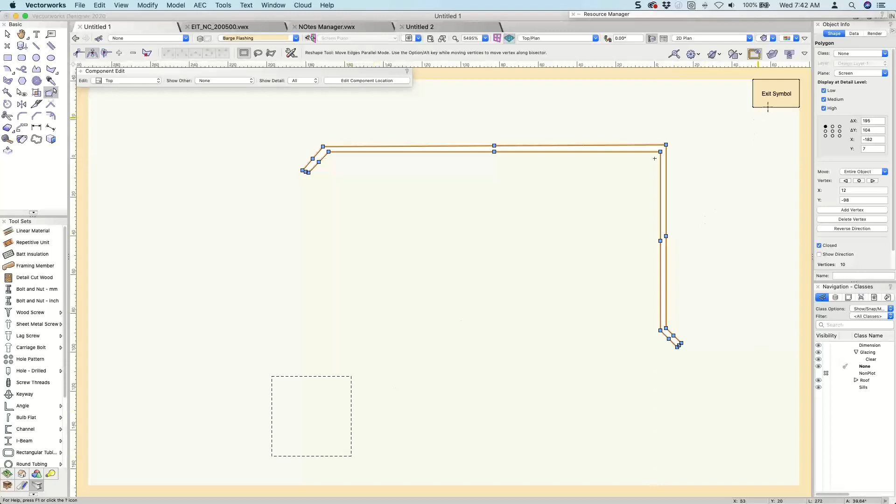Exit my symbol. I just need to change the elevation of this. I'm going to do a move in 3D - I'm just going to move it up half an inch. And now I've got a flashing, which I think is kind of cool.

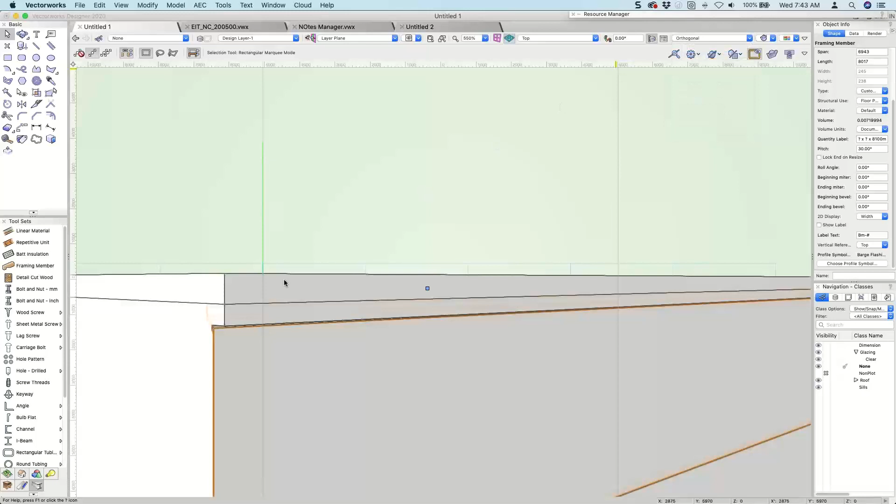In plan view, you can then move that across. So from here, you can move it down. It's going to work better if you do it in a top view, particularly if you do a top view, which is orthogonal and wireframe probably - wireframe. Because what I need to do is move that edge to there, and that should be perfect.

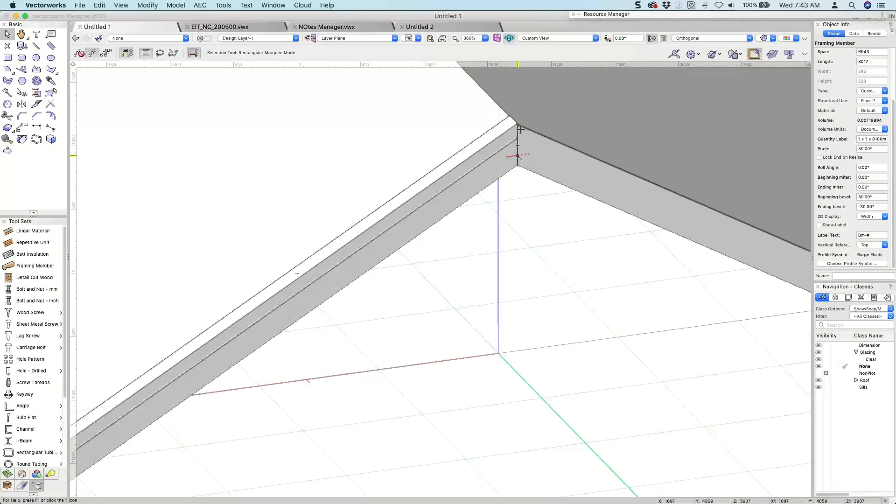There we are. And the top edge here, if you need to, you can play with the type that it is - I think there's a beginning miter, beginning bevel, maybe 30 degrees. So I've got a -30 bevel on the top, and I should have a 30-degree bevel on the bottom. There it is, and you can see I've created my 3D part.

So what do you think, Brandon? Is that another trick you can do? If you use the framing member tool, then you can actually put on the flashing as well, which is not a bad trick.

Are we getting off time, Barbara? Are we getting through these? Richard's got a question. We're doing good, Jonathan. Yeah, Richard, I'm not sure I can do your roof trick. Richard's got a question about the roof.

When deleting a roof composed of components, I'd like to delete the roof structure, leaving the sheathing and the shingles, so I can make the rafter tails.

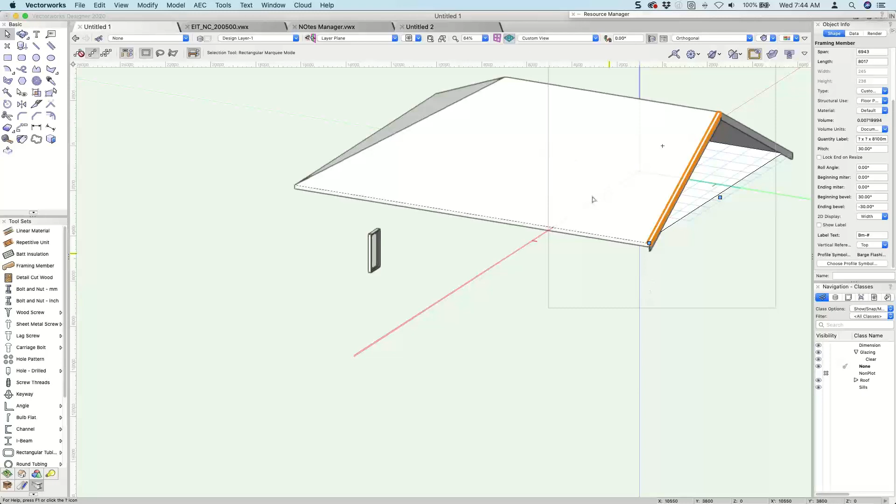One of the big problems I've got with that, Richard, is that the setting out of the roof, the height of the roof, is always measured to the underside. So when you want to leave the sheathing but delete the roof structure, it becomes tricky because the roof drops down by the amount of the structure. As a second idea, what about putting your roof components on a class and then just turning that class off? So you don't change the height of the roof, you're just turning off the class of that roof component.

Let's go components. So we can create, what do you call it, sheathing? I'll call it covering. How thick's the covering? Mine's about 1 inch thick. We'll just move that one down. What's the next one we've got? We've got another new one, which is my purlins - about 45 millimeters, about 2 inches. And then I've got my structure.

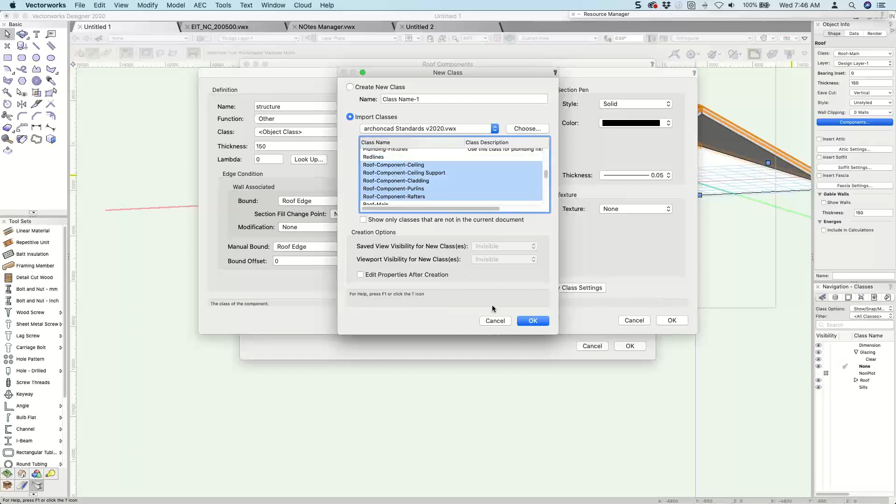So what if we start adding classes to this? Let's find roof. Have we got roof classes we can use? I've lost roof component - here we are. So we've got purlins, let's do all of that. Let's import those - that's rafters. Yep, that's what I want. This one here, let's edit this one.

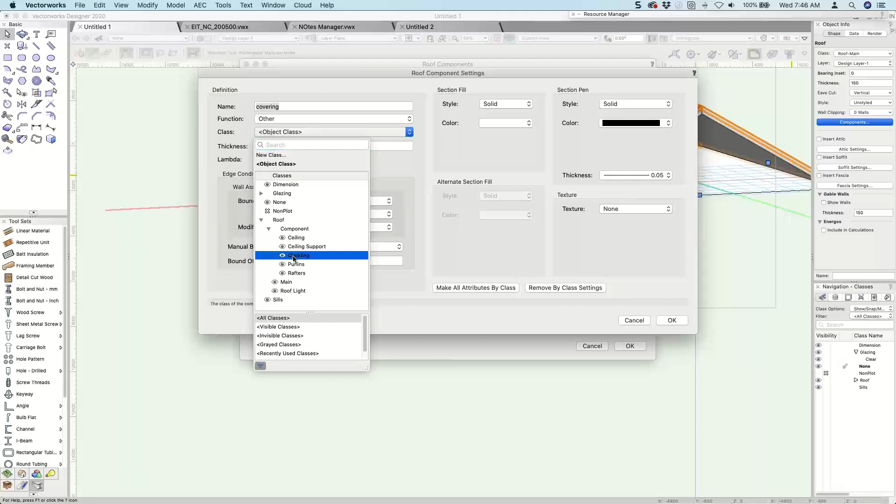We'll call this one object class, which is roof component purlins, and this one will be roof component cladding. So I've got these components now, Richard - do you want to turn off the structure? What if we go to roof, rafters, and we turn off the rafters? I'm thinking maybe this one, Richard, is an easier one to do because that way you can get rid of some of the bits.

I want the component over the heated space, not just beyond the wall. You could change those components and tell this component to bound to the inner face of the wall core. I haven't got a wall core, so it's not going to change it, but you could do it that way.

Someone's asked, what's my workflow? What does that mean? For creating reflected ceiling plans. I don't have much time to answer that one. My workflow, do I have any? I don't tend to create a reflected ceiling plan.

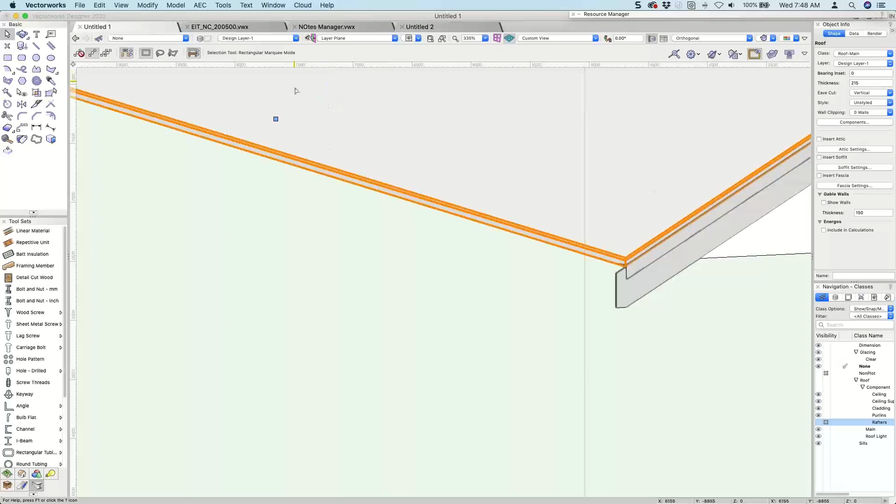I tend to create a floor plan that shows the electrical work. But if I was going to create one, I have in the past created reflected ceiling plans, and I tend to use layers and classes to create them. I haven't got anything I can show you, I'm afraid. But if we use classes to control things like electrical work, then maybe I've got one I can use. Let's go to a floor plan.

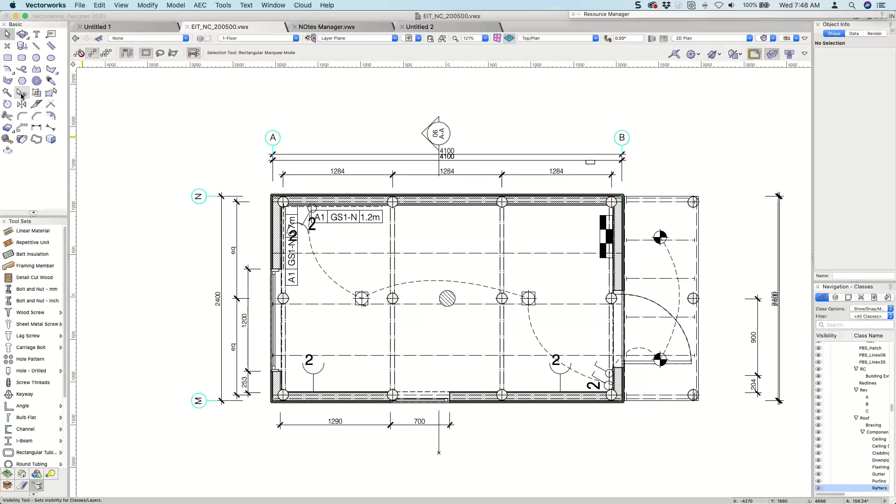Okay, here we are - this has got everything turned on. So how would I create a reflected ceiling plan? I get rid of the things that I don't want, using the visibility tool. So I don't want to see my floor framing, I don't want to see these dimensions at the moment, but I want to see my electrical. And what I would start to do - these are my structural columns, let's get rid of those. But I'd also create a...

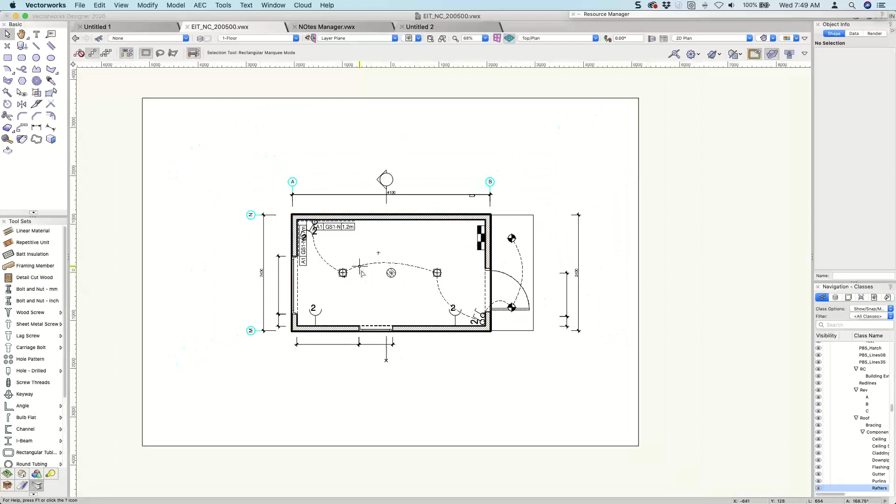It may not surprise you, but I use a lot of classes to control information. So if we go to my electrical drawing, you can see my walls are just as solid as anything else. But because I'm using classes to control information, I could easily change that - I've got some here called wall component frame. So let's look at wall component frame, edit this one, and change the graphic style so that it's not as dominant.

So it's going to be a solid, white line. I'm going to change the line thickness and make it thin. Let's see if that has a difference. You can see that's made quite a difference doing it that way.

The other thing you might want to do for a reflected ceiling plan is turn off some of these components. I want to turn off my baseboard, my cavity, my cladding, my frame, and my lining. Let's have a look at that.

Now I've got another one called wall proposed, this one here I think. Let's edit that one, that's solid, that's fine. This is the one, wall proposed too, so I can make it solid. I could give it a light gray fill. Let's preview that.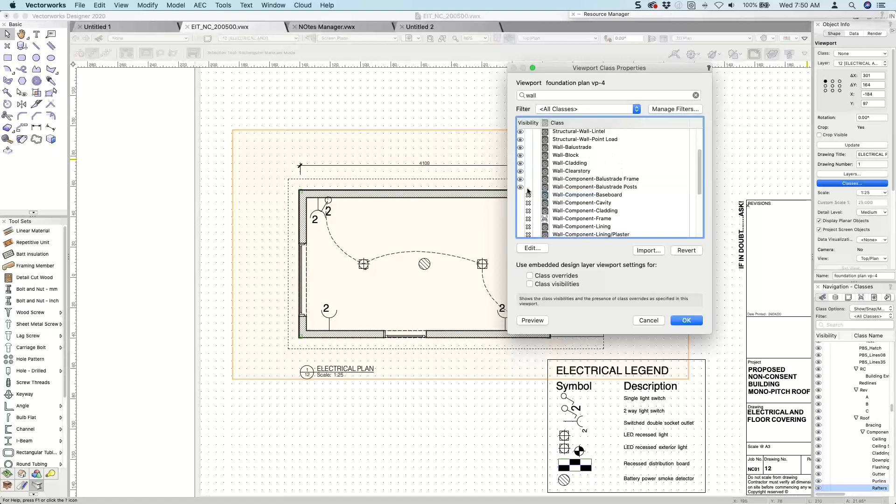I thought I turned off framing, I was trying to get rid of that framing through there. But the framing, you can see my walls have shown up again around there, which is not what I wanted. I thought I had a class for the covering. Yeah, wall covering's turned off, unless it's on a different class I haven't thought of yet.

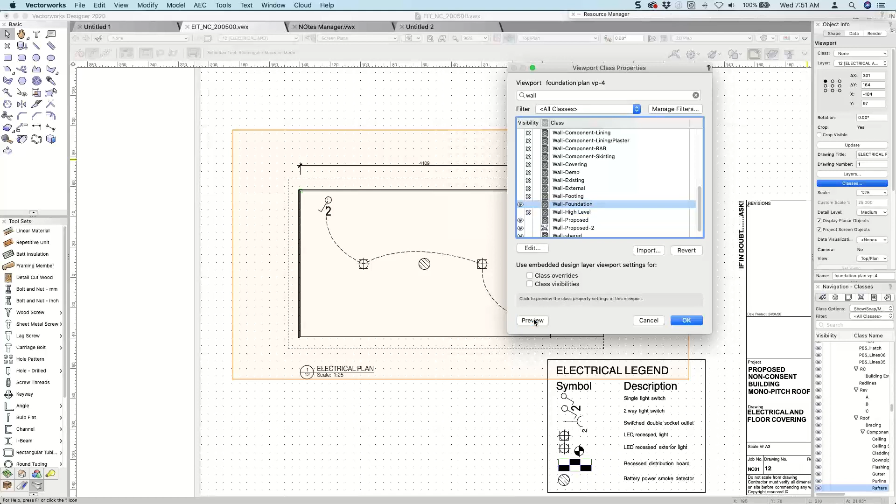Maybe it's on one of these ones. Might be wall external. Oh, it's wall external. Okay, let's edit that one again. We'll make it solid, we'll make it a light gray color, and we'll make it thin. That way I can see my walls, but I can see them differently.

Now, the other thing, of course, is that if it was a reflected ceiling plan, I really want to fill in my windows. So it'd be nice if I had something with my window that I could use to fill it in. If I got lintels, door lintel, this one here. Let's preview. Quite often I use a class like this one, the door lintel, for these dashed lines through here. And I could also change that one to match exactly the same as the other one. So without changing my design, without drawing extra information, I can use classes to control my reflected ceiling plan.

I think I've done Brandon's thing, I've done Richard's thing. So, Mr. Stiles, does that help my workflow for reflected ceiling plans?

In a window with a transom, the transom takes on different settings. The mullions are smaller, the glazing class is different, and the stop differs.

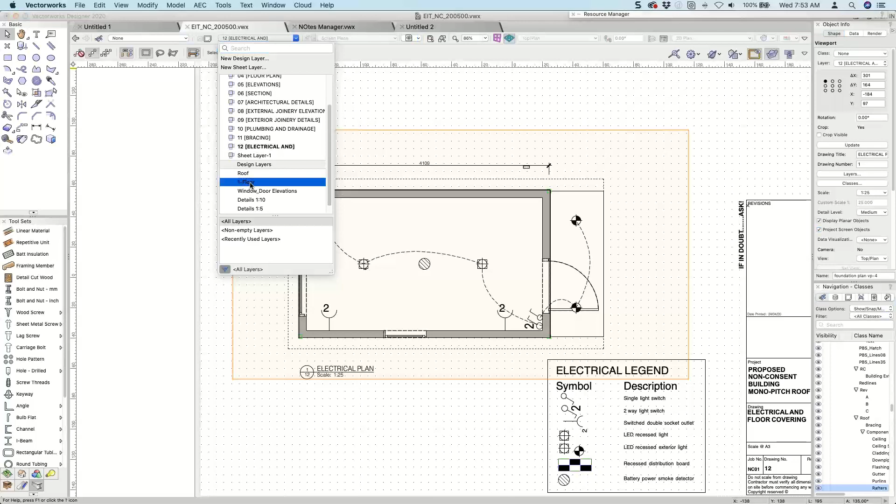Let me go back to that. I don't use transoms very often, so I need to go back and have a look at my window. I might need to add a transom to my window. That's my window there. Oh, it's a window, okay. I haven't got Windoor installed on this particular computer, so I need to just place a window in.

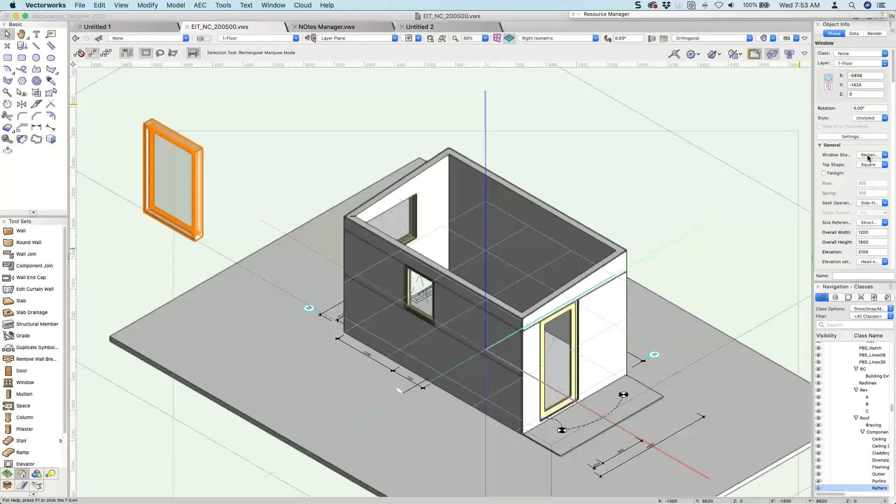Somebody asked me online this morning how I do my extra bifold windows with 3 on one side, 1 on the other. I use Windoor. Let's make it 1200, let's make it 1800. So one of the challenges I've got is that I'm used to using a different window system. I like using the other one from where I live, we get Windoor.

So I think in order to do what you want to do, don't I have to do a... who am I talking to? David. So David, I think in order to do what you want to do, don't I need to make this a custom profile with 2 rows like that? So I've got different sashes, top and bottom. And then you want to control that.

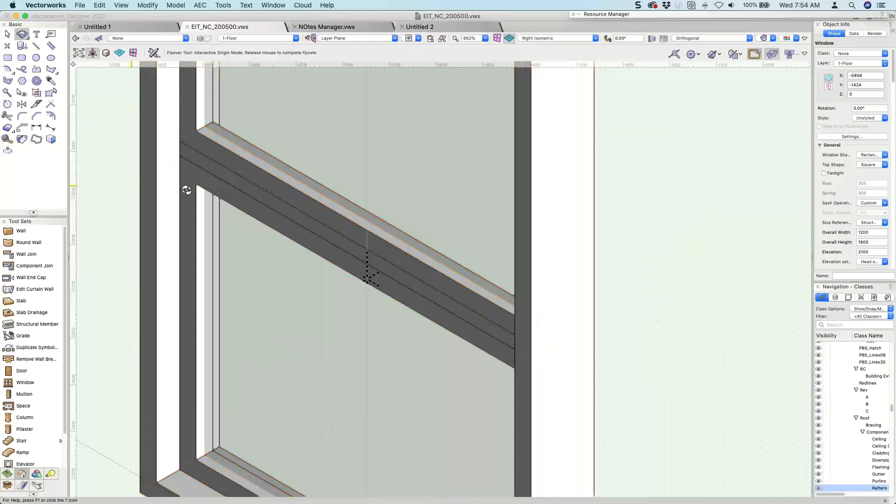So sash width, so the fan light should be, so the transom bar should be this one here. I should be able to edit this transom bar separately from other parts. Hopefully that's done it. But to me, it doesn't look like it has done it. But that's where I'd start looking. As I said, I don't use the standard Vectorworks one very often.

We call it a fan light, you call it a transom. Window shape, top shape, square, round. I think the transom bar might be this one here. Okay, let's have a look. That might be where I've done it.

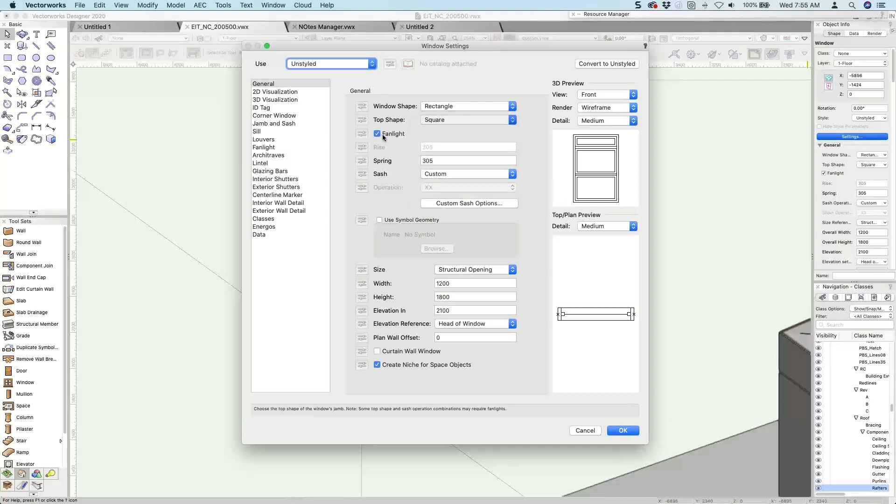Oh, there it is. So David, if you want to change the size, you need to use that top. Where'd it go? Here you need to have a top shape of square, tick the fan light, and then put the fan light at the top of the transom, I think in America that's called a transom. So you can tick it there.

How are we doing on time? We're getting close to the end, aren't we? Yeah, we have a few more minutes. Yeah, we're running out of time.

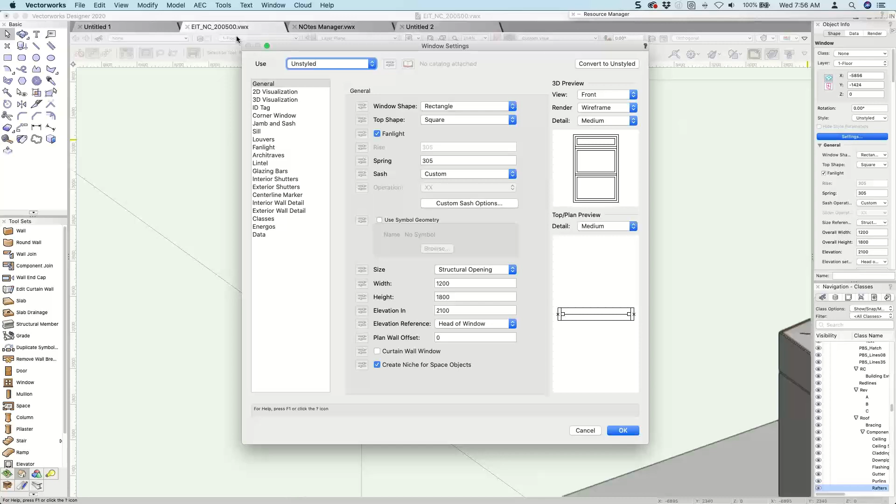How to link a detail symbol to a detail on a sheet layer. Oh, that's probably an important one. I got any?

Let's have a look, I'll see if I've got any. Foundation plan. Okay, so let's put in a detail - this will probably be the last thing I can do, to put in the detail.

I need dims and notes, and a section elevation reference, I think that one there. I'm going to use it in this method - you've got to use it in this method, I'm afraid. Detail call out, I don't want that one. Section reference, so I want to put a detail through here.

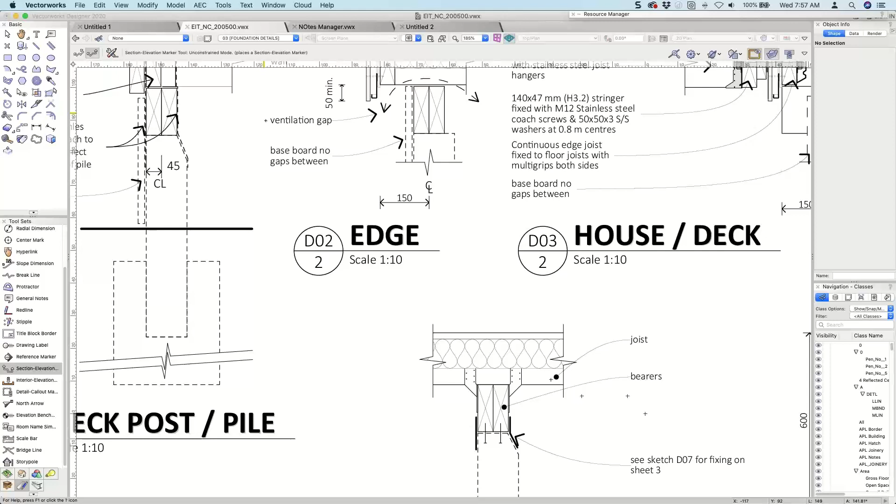I then click over here. I need to link it to a viewport, and I need to know what that viewport name is, which would be really handy if I knew what it was. So let's go to my details, foundation details. Now I think I've cheated here and I've got all of these details on one thing, and it's a PDF page, so I haven't even got a viewport that I can connect to. That's a terrible example then, isn't it? If I had a viewport here, I could link to a viewport.

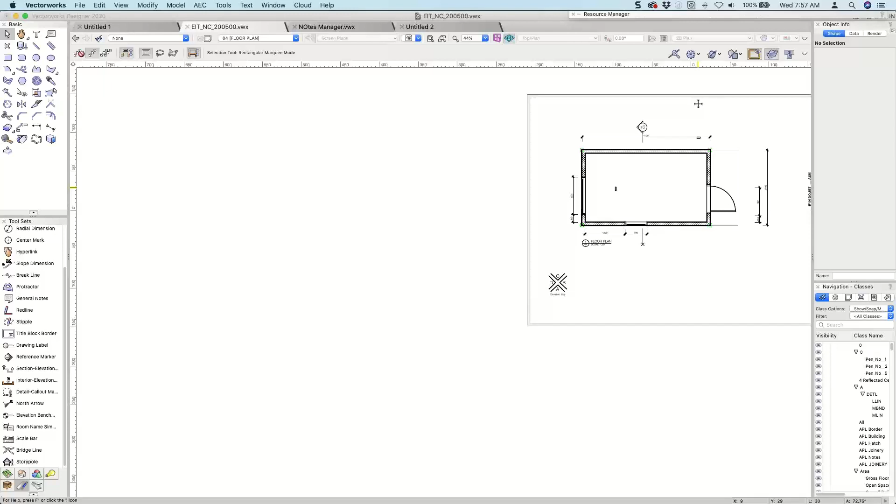What can we do with that? Let's cut that. Go to details 1 to 5, we'll paste that there. And I'll make a viewport from it, so that's going to be a viewport.

You there, Barbara? Yep. My computer's going slow. I hope it didn't freeze. Last week, yeah, because I've used a different computer since I had that freezing issue.

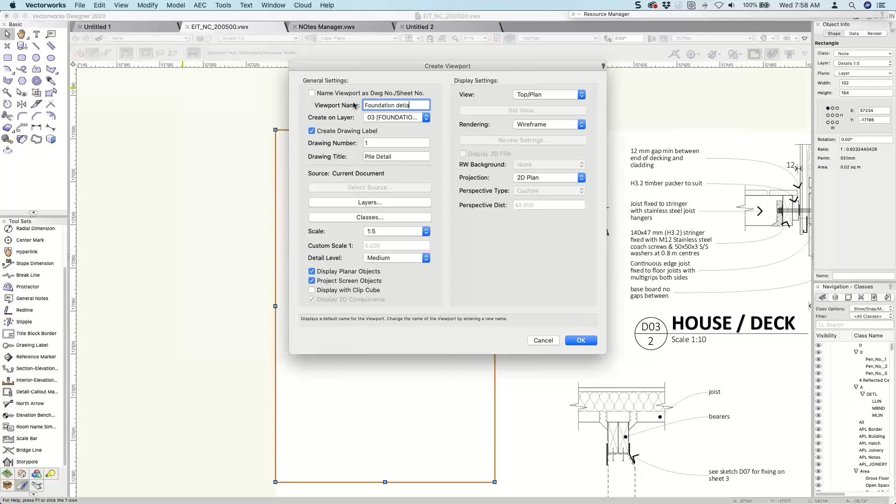Okay, let's make a viewport. So we're going to go view, create viewport - yes, we want to do that. We're going to put it on our foundation details. This is going to be number 1, it's going to be my pile detail. It's a good idea to name these - if you don't, it can be a little bit troublesome. Foundation detail 1.

Okay, so now I should have a viewport on my - good, I got one there. It's all at the wrong scale, I'm sorry, because I didn't set this up properly. So there it is there. So I've got a viewport.

I then go back to my drawing, this one here, the foundation plan. And what I should be able to do is select this label here, click here, and say foundation detail. And now it's connected.

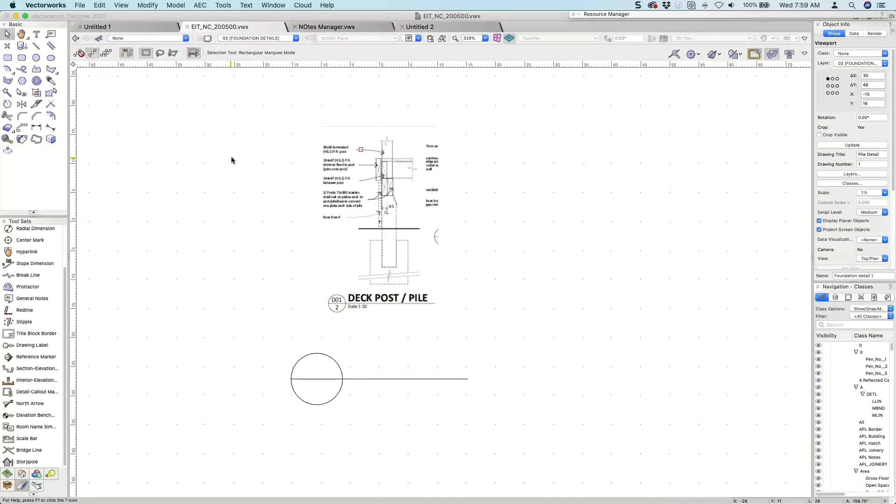No text at both ends, set marker styles. I've got one I created called null somewhere because I don't like some of the lines that it gives me - this line, I don't like that. So I actually created another one. I can't remember, oh, it's on another computer. I created a different one because I don't like some of these where they've got like a heavy section line.

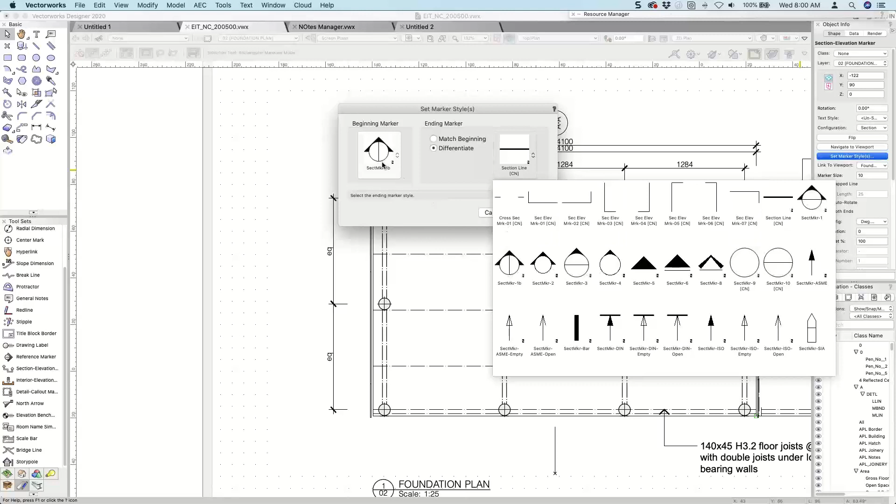Anyway, that's how you connect them together, which is kind of cool because you can connect these together. Let's undo that, and we'll choose the marker style, which is that one, I think. And I want to differentiate the end one, but I don't like having these heavy lines on mine. I like just having a simple line, but there are very few that are nice for these ones. So I created one which was just a dot at the end of it, and it works really well.

So Barbara, I think that's probably it. We're running out of time for today. But so just more - before we go, just let me do a quick advert.